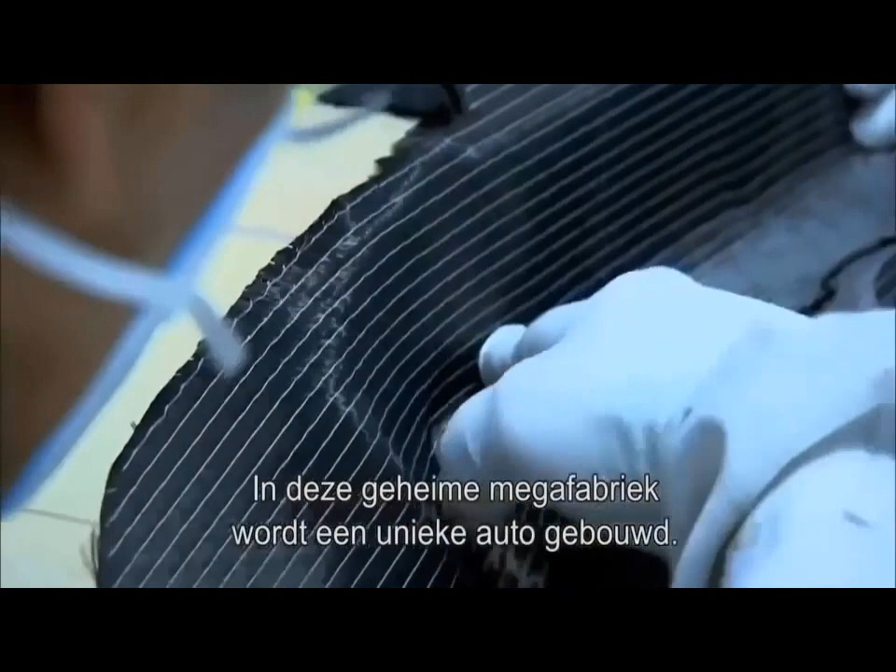Inside this top-secret megafactory, a car like no other is taking shape. Craftsmen hand-build what they consider an automotive work of art. Money is no object. This machine must redefine a billion-dollar brand. Failure is not an option.

Japanese marque Lexus sells itself on luxury, marketing its cars as elegant, quiet, high-tech, and efficient. Now, a different kind of car wears the Lexus badge, the LFA. Aggressive, loud, agile, with the highest revving V10 engine in a production car, reaching 325 kilometers per hour. A car like nothing Lexus has ever produced before.

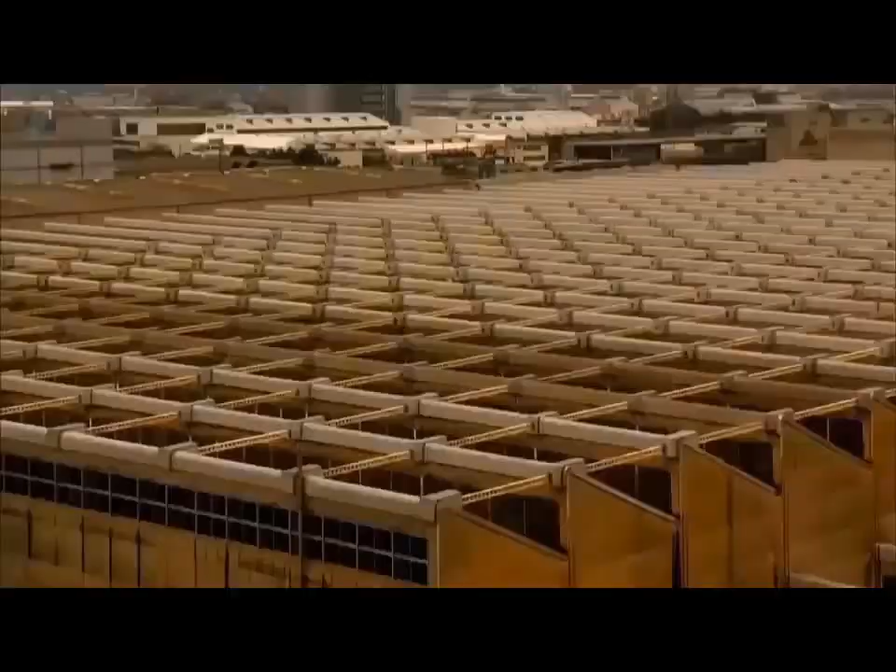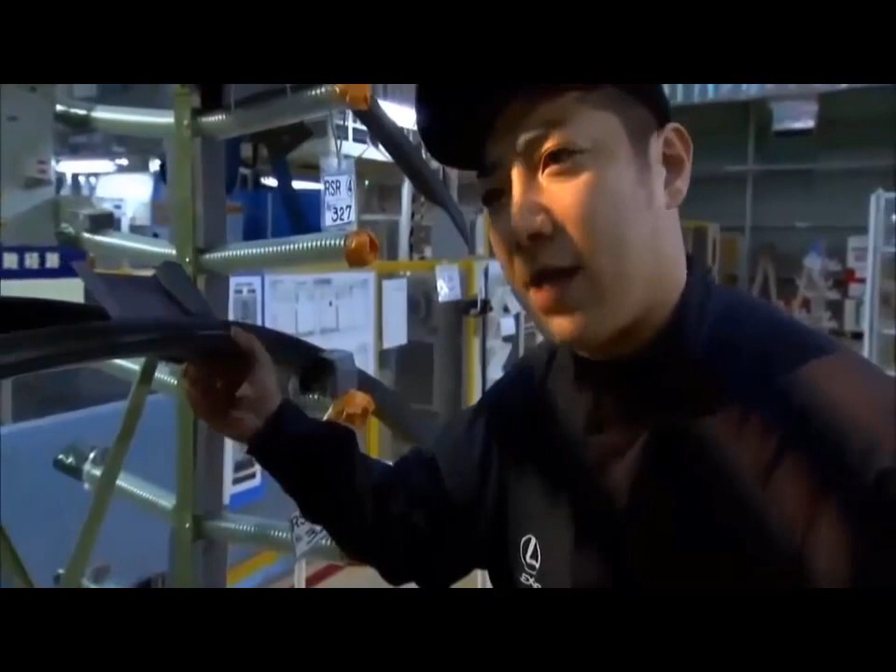The company transformed two unassuming blocks of this megafactory to create the LFA. They then scoured Toyota's 50,000 Japanese workforce to handpick just 175. All the associates here at the LFA Works feel they are artisans, not just operators. These artisans are known as takumi, Japanese for craftsmen, a status only conferred on the most highly trained, skilled workers.

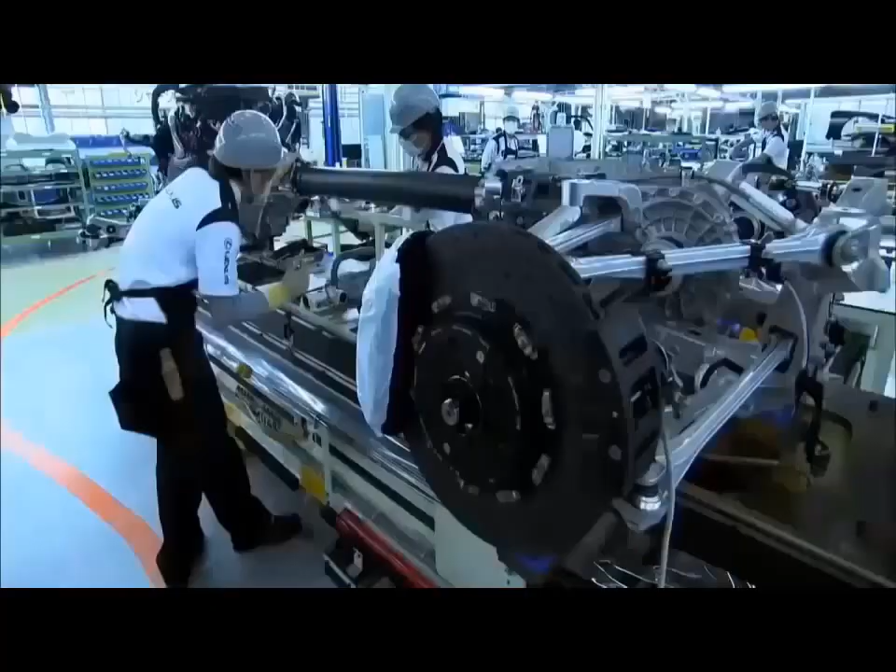Each and every associate at the LFA Works is seeking to achieve perfection, taking this challenge on with a sort of samurai spirit.

Yamanaka Shigeru is manager of the LFA Works. His teamwork credentials come from another time-honored Japanese tradition: baseball. Before this, I was working as manager of the Toyota Motor Corporation baseball team, which brought people together from lots of different backgrounds. It was because I could manage that organization that I was made manager here.

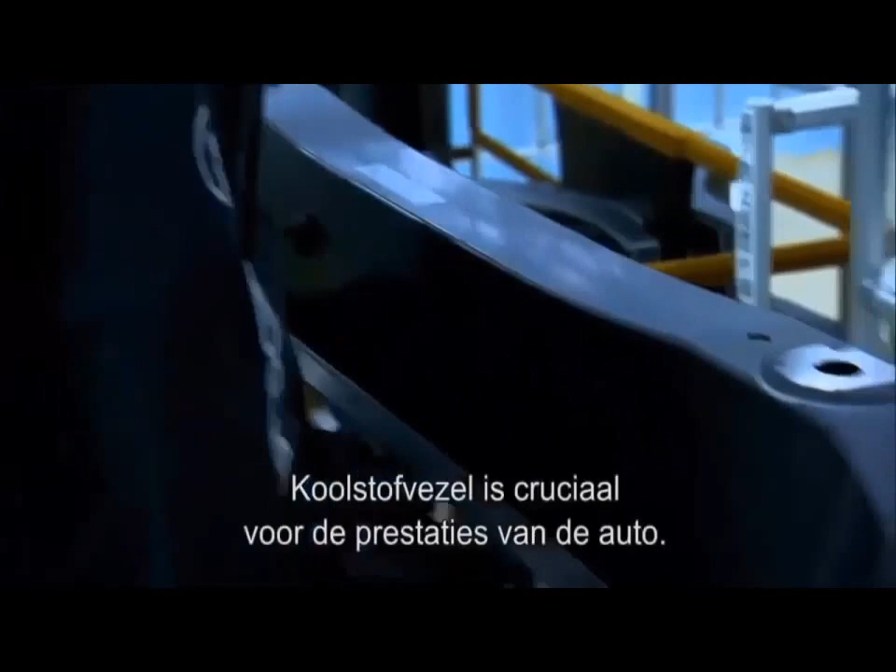To reach their goal, the tight-knit team utilizes sophisticated tools and materials to build the car. The most important of these is carbon fiber composite. Carbon is crucial to the car's performance. It's a material 5 times the strength of steel, yet a quarter lighter. It's the construction material of choice for both Formula One racing cars and the aerospace industry.

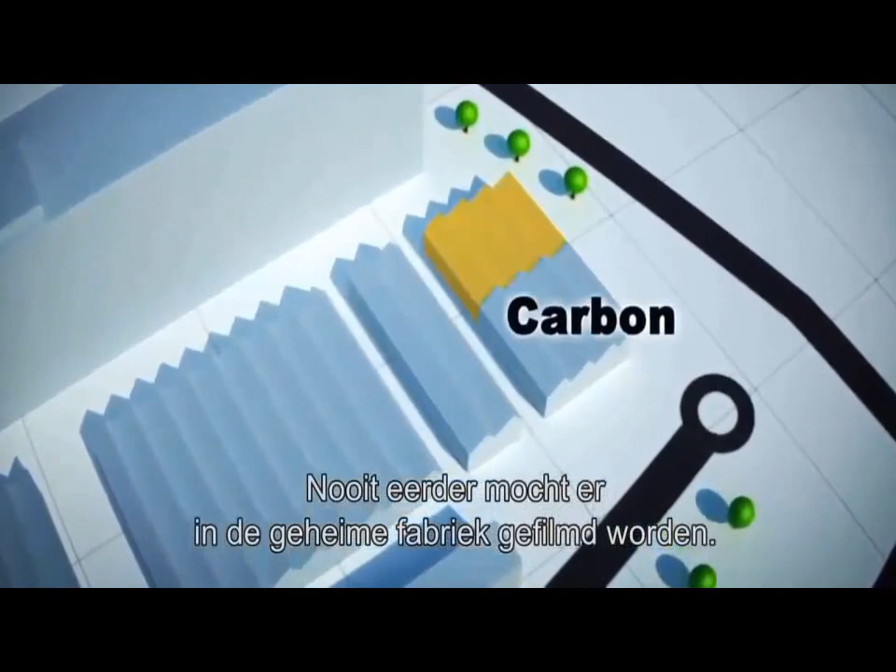The company even makes their own carbon fiber here on site. Up until now, no television cameras have ever been allowed inside this top-secret facility. First, simple strands of carbon fiber are woven into a pliable cloth using an automated weaving machine. This fabric is then transformed through heat, pressure, epoxy resin, and labor-intensive techniques into the car's core, known as the tub.

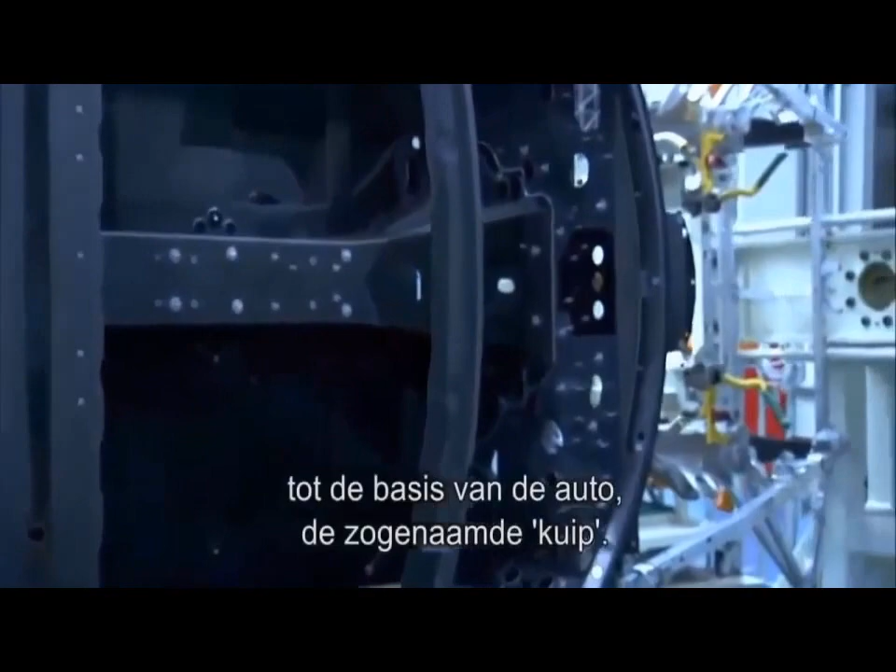The tub is pieced together like a 3D jigsaw. It starts with the construction of the floor. To make it, precisely cut carbon fiber cloth is lifted onto a mold. Next, skilled takumi smooth the supple fabric over the mold. This one is for the transmission tunnel that will house the drive shaft and exhaust.

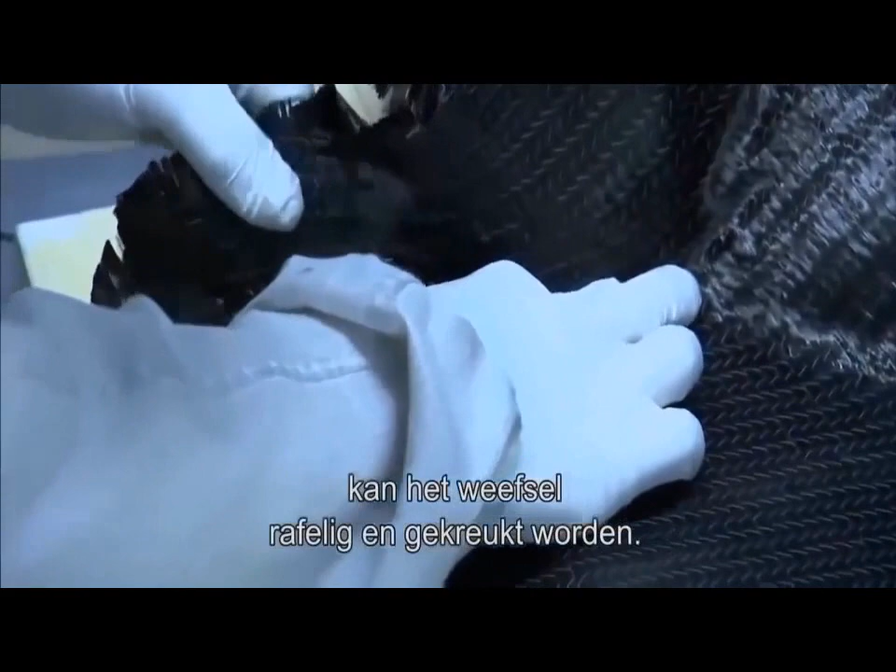In very complex areas like this, the fabric inevitably becomes frayed and not very neat. The associates work with these areas as if working with silk, taking great care every day. They also wear masks to avoid breathing in the hazardous fibers. In the beginning, the associates found it very difficult to work this material. It was much easier when they used an iron.

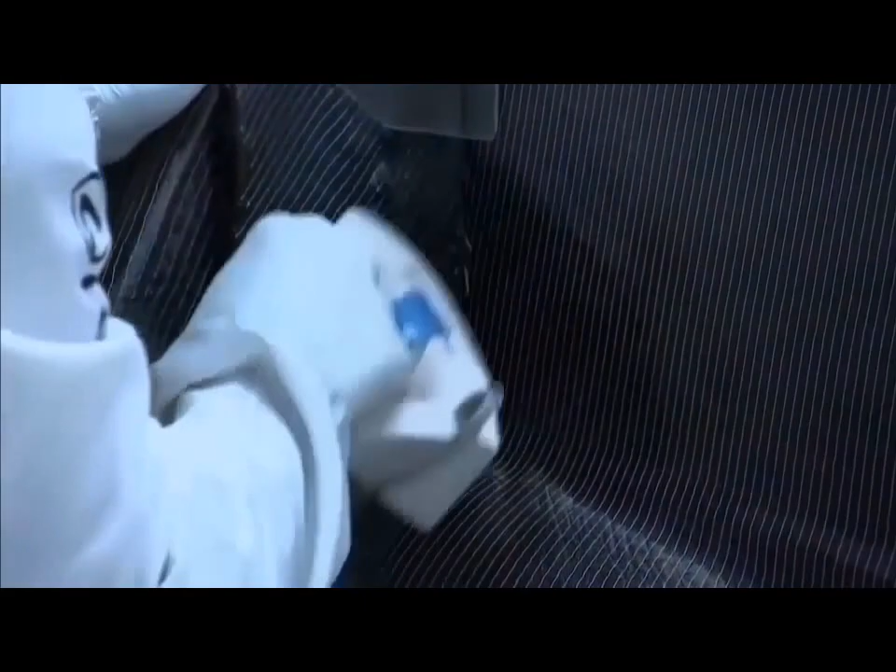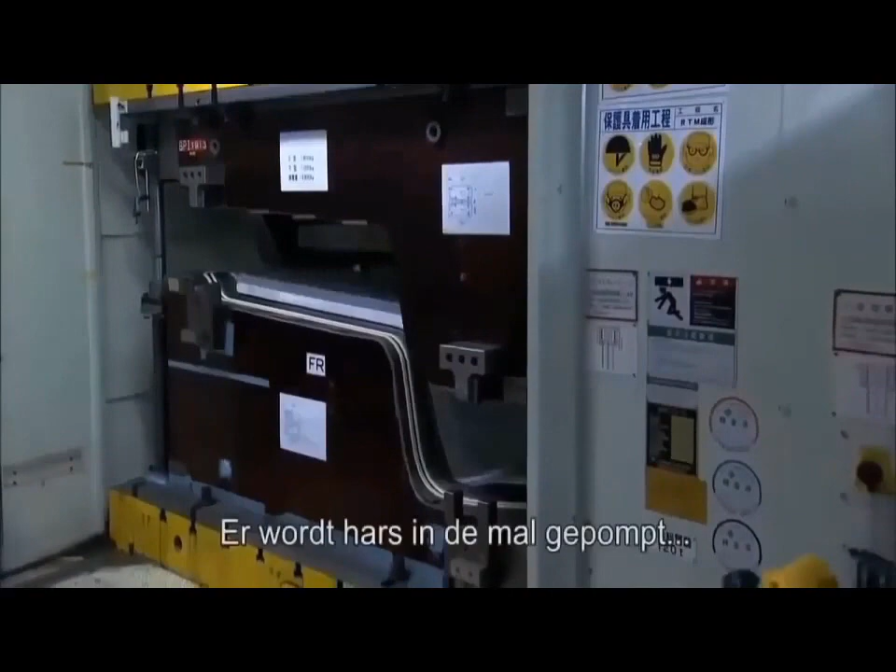Back in 2000, the concept of a world-beating supercar only exists in one man's head. At the company, I talked to just a small group of people at the top, not expecting anything, and they said, go ahead and try.

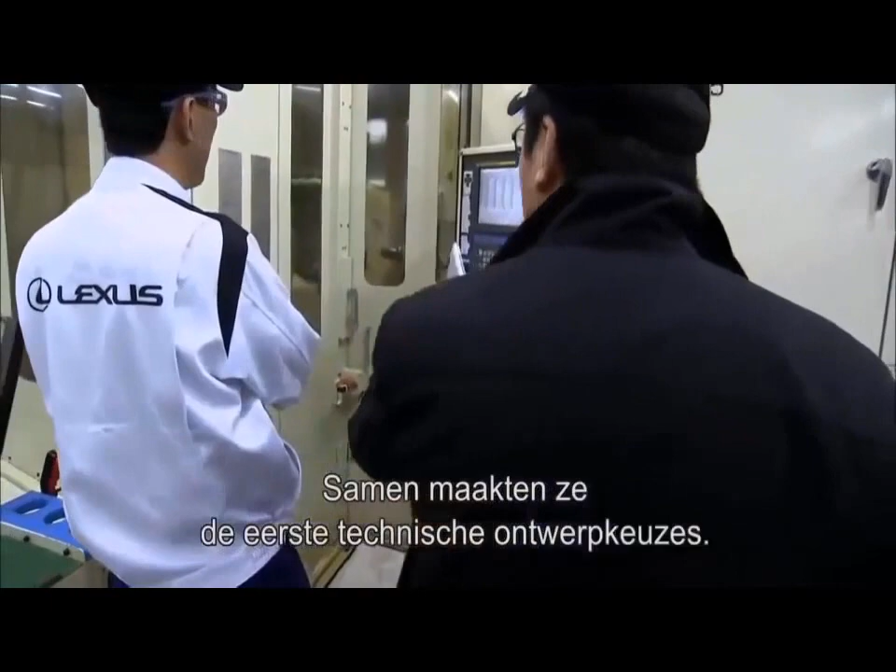With permission to proceed, Tanahashi gathers a team of engineers around him, and they start to make the basic engineering decisions. In the beginning, we planned to make the body from aluminium.

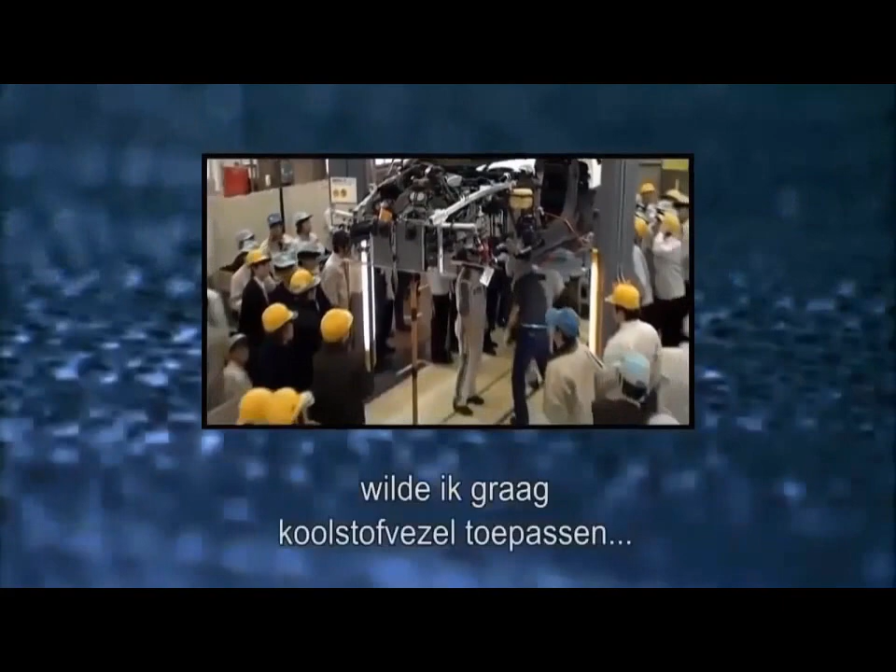But Tanahashi is fascinated with the possibilities offered by carbon. Developing a supercar, a super sports car, carbon fiber was a material I really wanted to try using, if at all possible.

But this wonder material has its drawbacks. It's expensive, and the company has never used it to build any of their cars before. Despite these significant challenges, Tanahashi gets his way.

In 2005, my boss said, why not go for carbon? Slapping me on the shoulder. And I made the decision to go for carbon then.

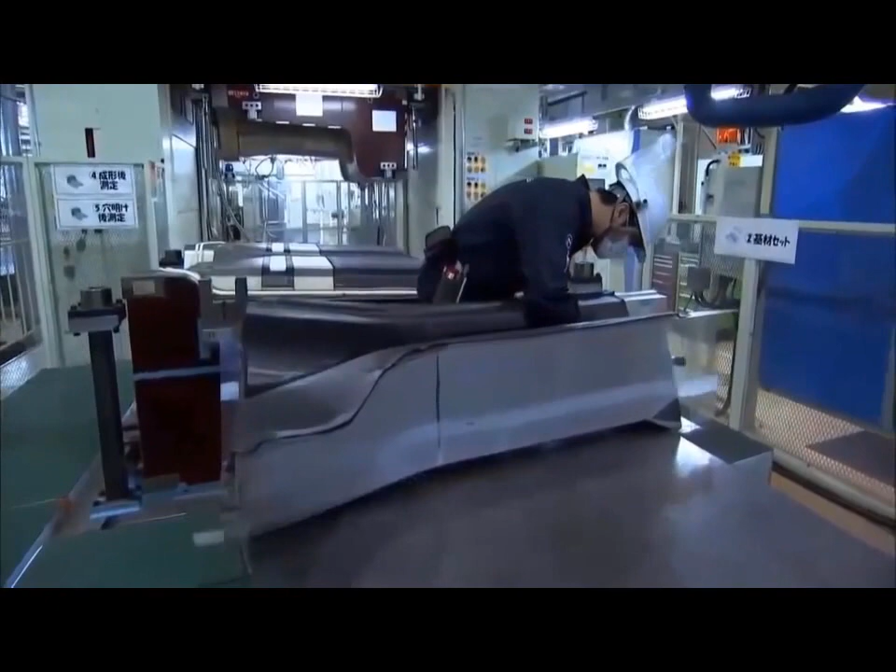It's a bold step. Everyone involved with this project must master a material they have no experience with at all. It was the first time the workers had touched carbon, and everything about it was difficult for the workers.

In the state-of-the-art carbon fiber facility, the Takumi are returning from lunch. They vacuum themselves down to remove any foreign particles before entering a highly confidential sealed room.

Here, the majority of the tub's central frame is created using the most intricate techniques. In this process, an automated laser cuts out hundreds of individual shapes from carbon fiber cloth that's been pre-impregnated with a sticky resin.

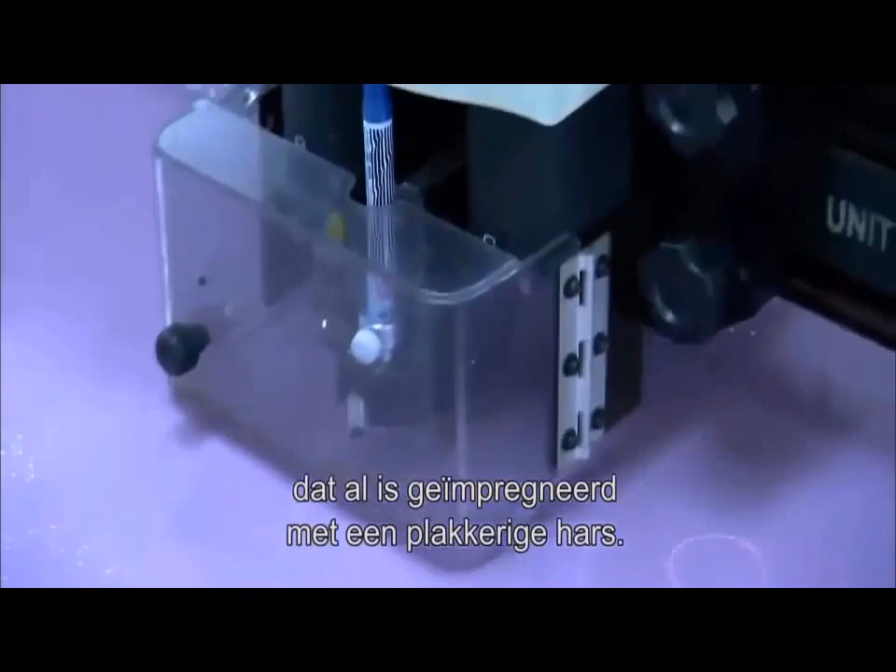Next, Takumi layer the cutouts, up to 20 sheets deep, onto a mold. This one will make the right side panel. The associate uses a dryer to raise the temperature of the laminate and half melts the resin as he applies it.

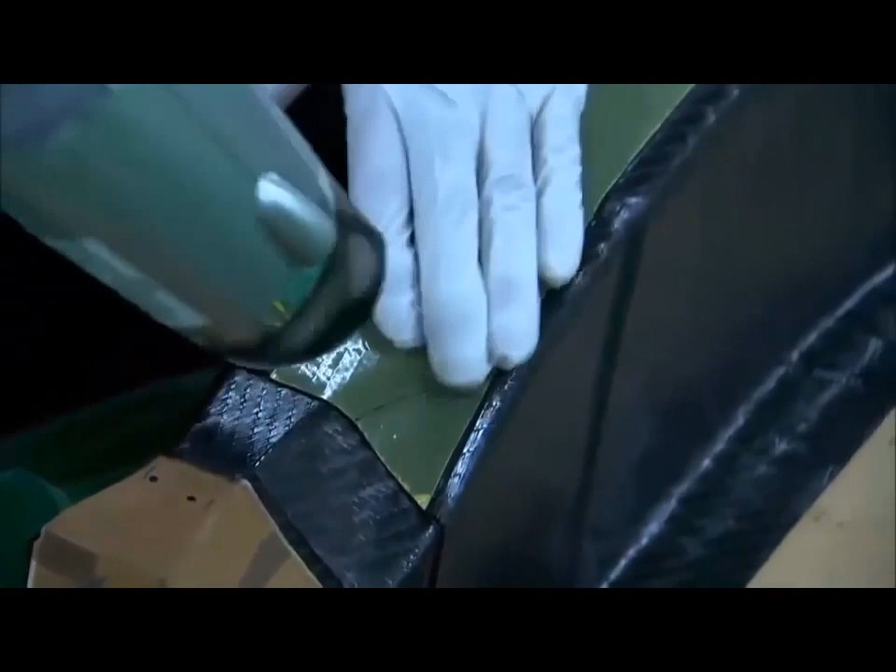The tacky cutouts stick to each other and any gaps are squeezed out using a vacuum bag that forces them together.

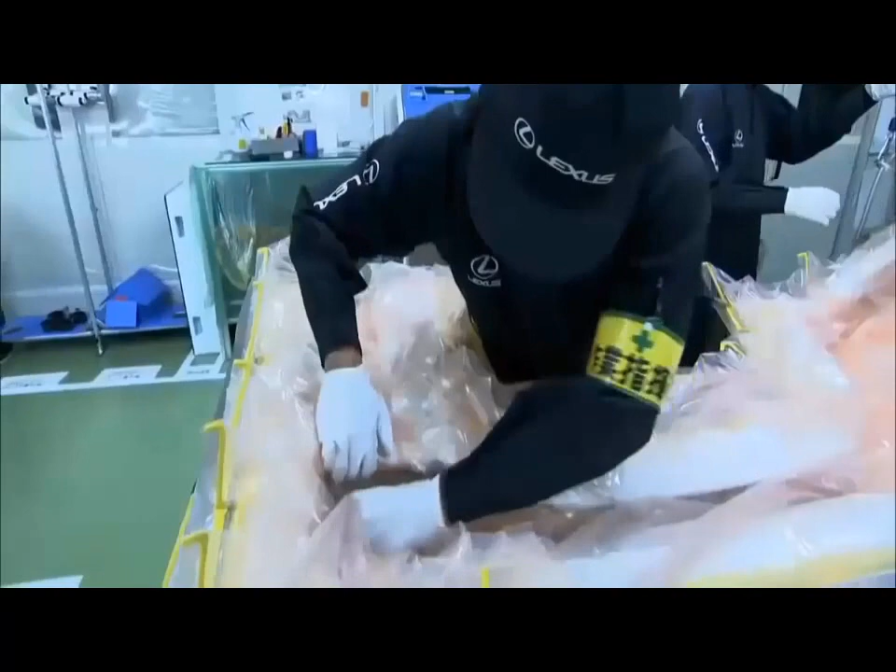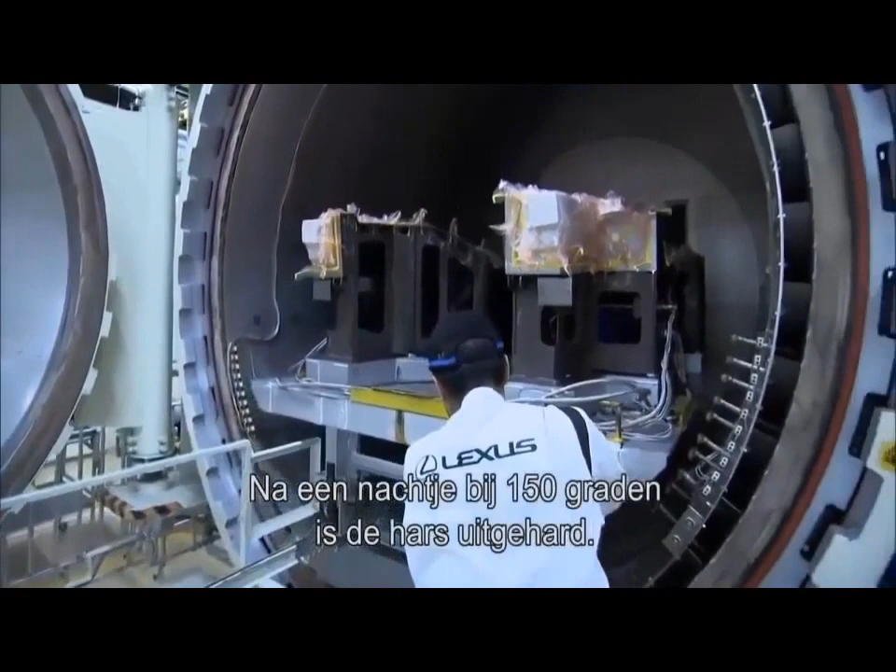The shrink-wrapped side panel is then wheeled across the works and loaded into a pressurized oven. Baking overnight at 150 degrees Celsius sets the resin, resulting in a side panel that's both ultra-strong and ultra-light. An aluminium equivalent would be twice as heavy.

Weight saving is the holy grail for all auto engineers. Less weight and more power leads to increased acceleration, and speed defines a supercar. The body of the LFA is 65% carbon fiber, helping it accelerate from 0 to 100 kilometers per hour in 3.7 seconds.

If made of aluminium, it will be 100 kilograms heavier, like having a sumo wrestler in the passenger seat. As it is, this car weighs just 1,480 kilograms all in.

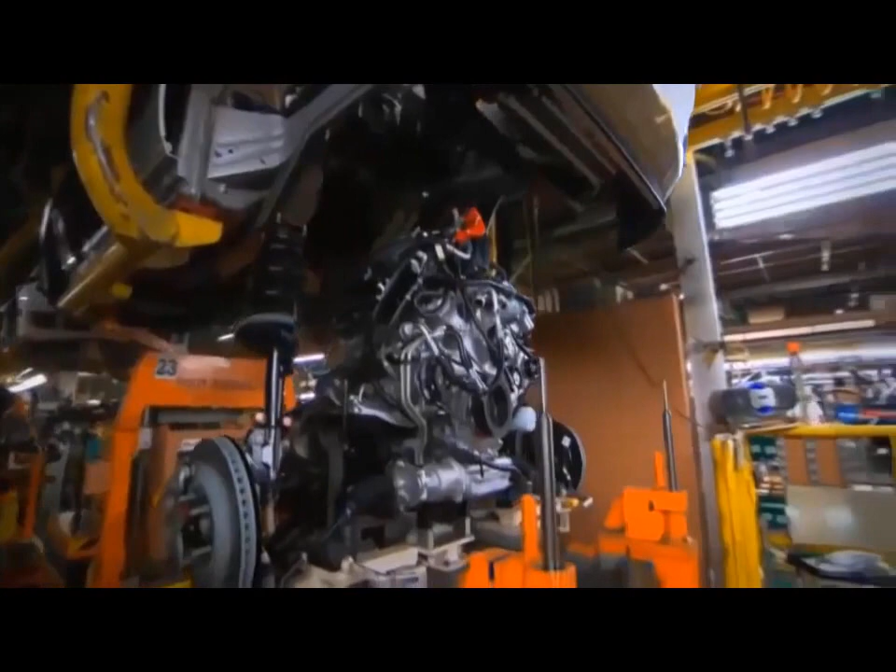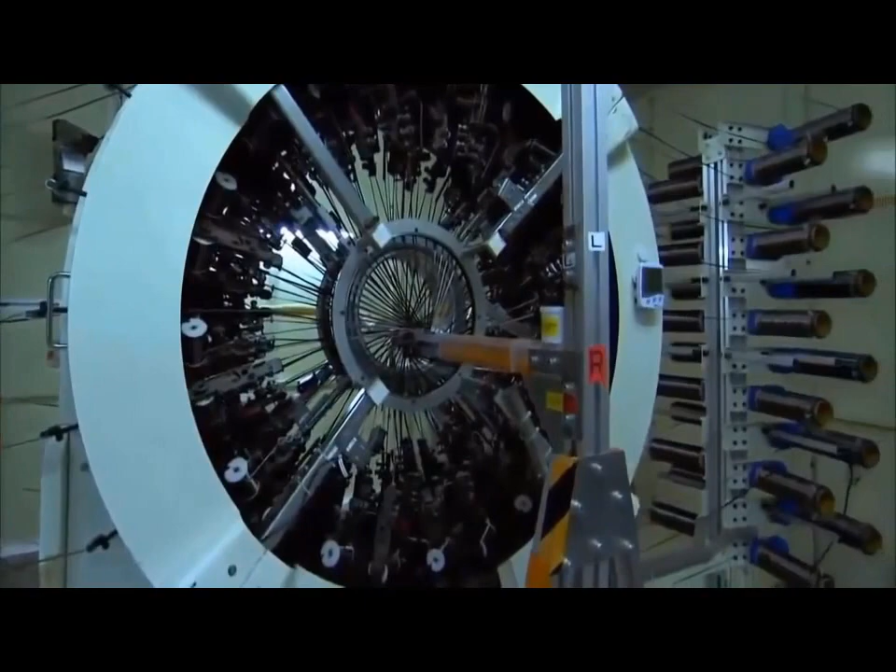Back at the factory, in a locked room, a bespoke machine creates two crucial parts to complete the tub's construction. The roof rails support the windscreen, as well as protecting the driver if the car rolls over.

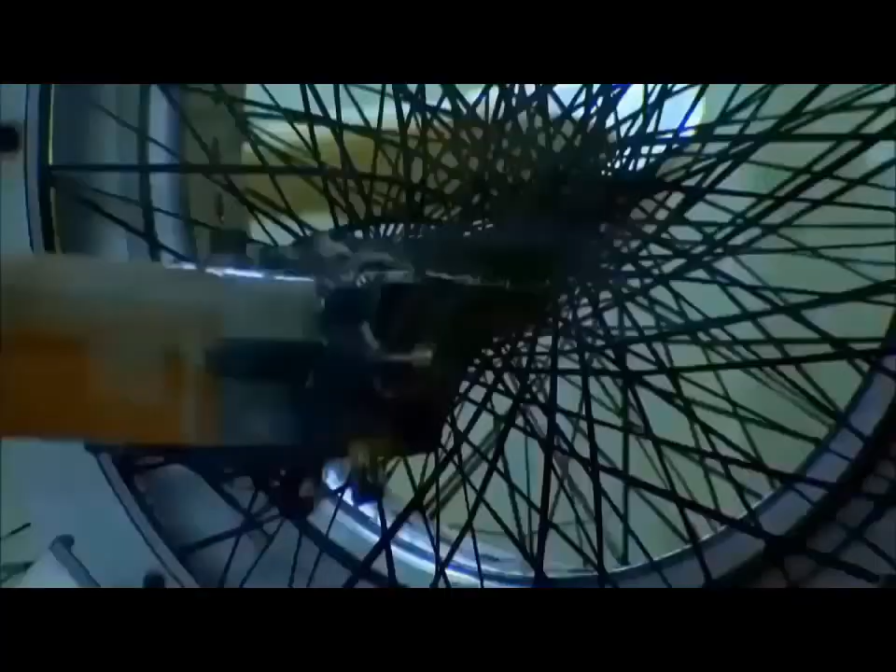This custom-built circular loom weaves the carbon rail in 3D. It uses lasers to control the feed of carbon fiber strands onto 144 bobbins. These knit the carbon around a top-secret automated template that's fed through the center of the loom.

This is done twice over to cross-hatch the carbon weave, so giving the rail its strength. The whole mechanism has its own control box, and for good reason. If something goes wrong, even a little thing, the shape gets distorted immediately, so the operator constantly pays attention to avoid this.

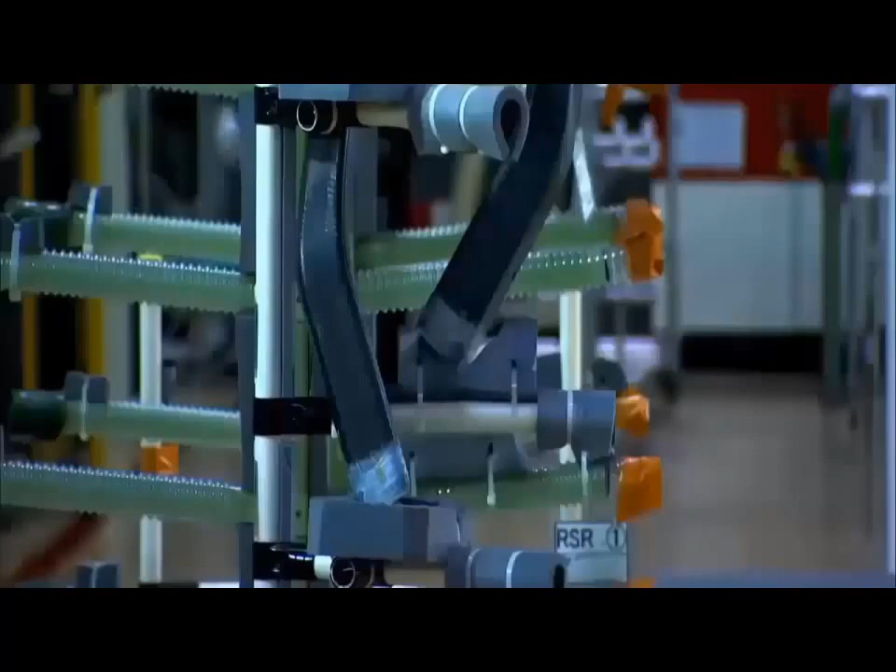The side rail is heated and impregnated with more resin to complete its metamorphosis from a flexible tube to a rock-hard rail. You may think that this is quite heavy, but it is only 2 kilograms.

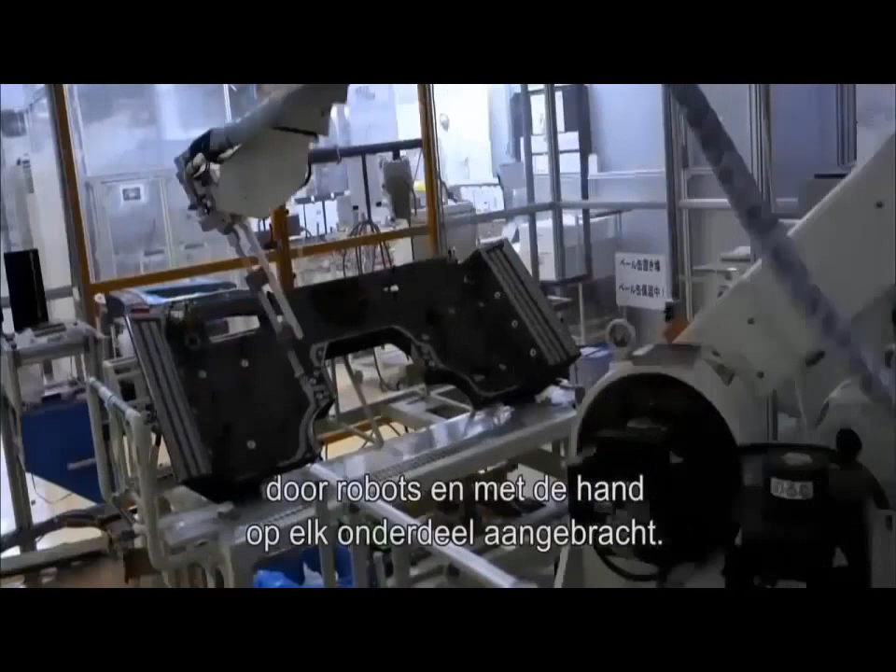The tub is bonded in another top-secret jig. First, a super-strong adhesive, known as epoxy resin, is applied by robot and hand to each of the parts. The separate parts are transferred to the jig and locked in place. Pop rivets keep the pieces aligned.

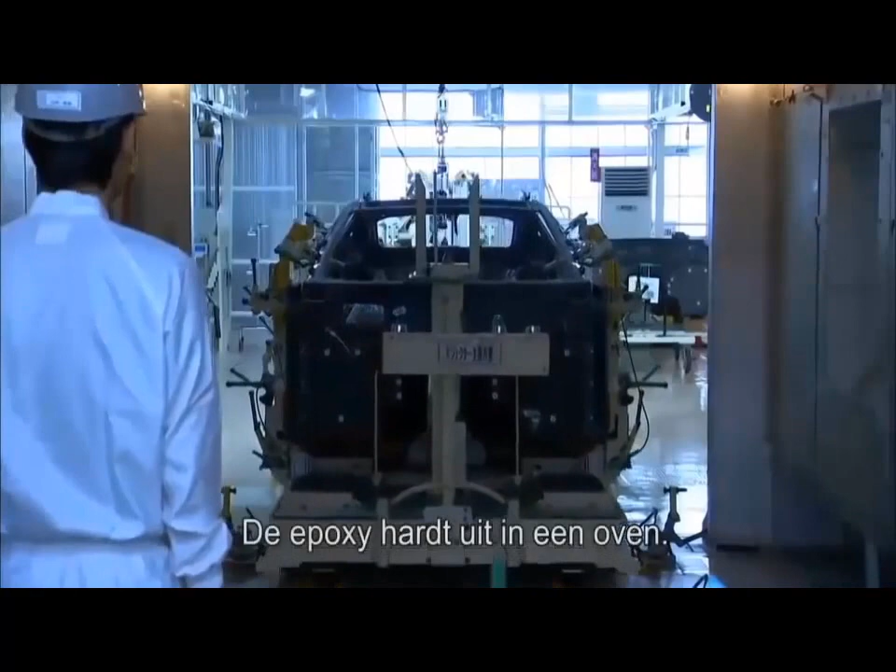To cure the epoxy, the jig is pushed into an oven and then baked for 60 minutes at 60 degrees Celsius. The resulting tub is so strong, it acts as both the structural core of the car and as a crush-resistant safety cell, should the car crash.

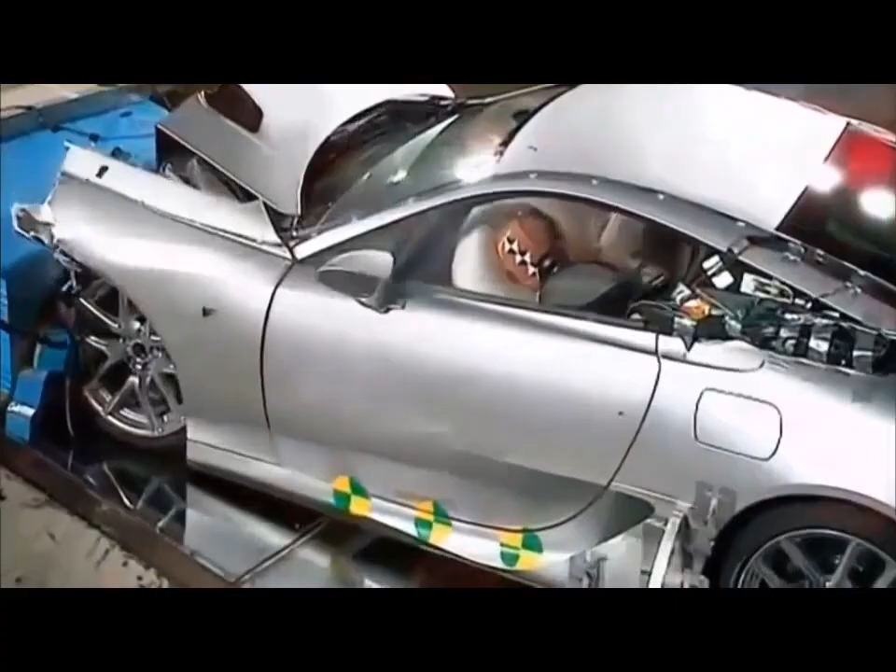The challenge now is for Matsumoto Kengo, chief designer of the LFA, to create a car with a body as technical as it is elegant. For us, aerodynamics, heat and airflow management should be tangible in the design.

A conventional car cools its engine with forward-mounted radiators that suck cold air through a front grille. Not the LFA. Front space is at a premium, so coolant is pumped from the hot engine to twin radiators mounted behind the car's rear wheels. Matsumoto had to shape the car to funnel cold air to these vital components.

Airflow management is optimally controlled by setting the angle between the door mirror and the cabin. It goes past the cabin and smoothly into the air intake for the rear radiator. This shape is not just for styling. The intake is deliberately formed here, from the base of the glass. The result is an airflow system capable of cooling the engine even under the most extreme race conditions.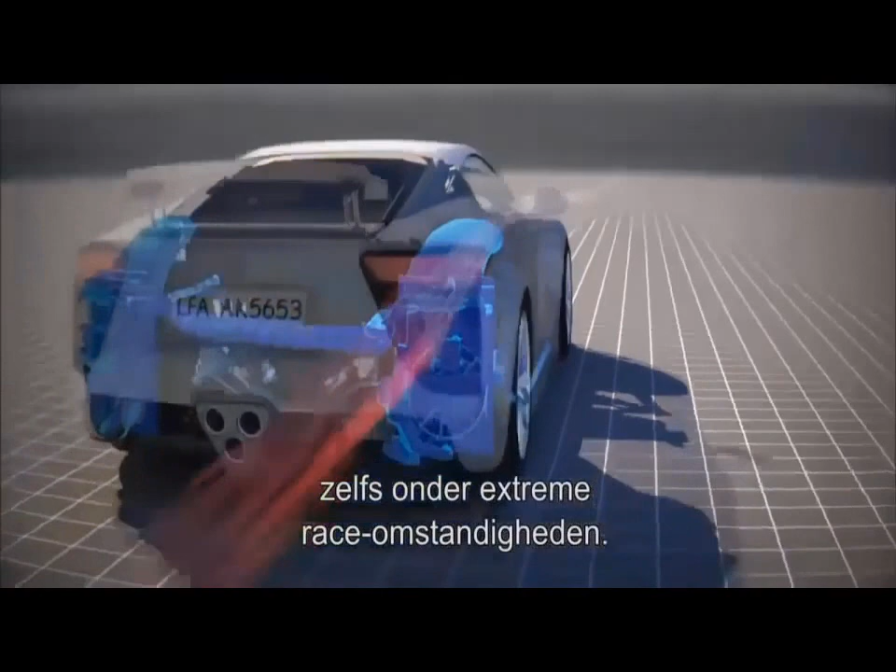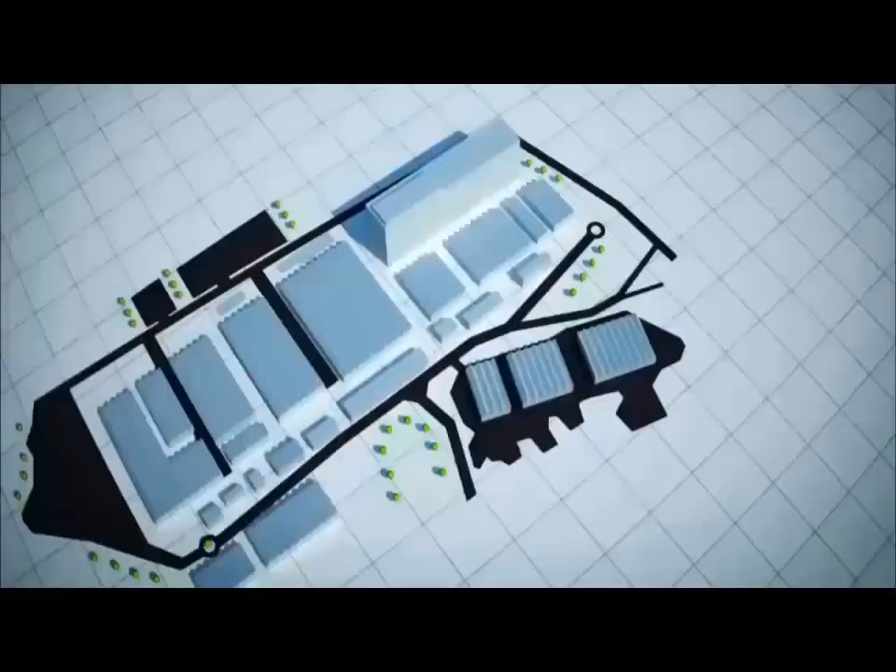It's 8:45 in the morning at the LFA works. The Takumi are warming up for an 8-hour shift ahead. Their first task is to greet the bare cabin as it arrives from its 15-day build in carbon round the corner. In assembly, the cabin will progress through 4 positions: trim, chassis, final, and alignment.

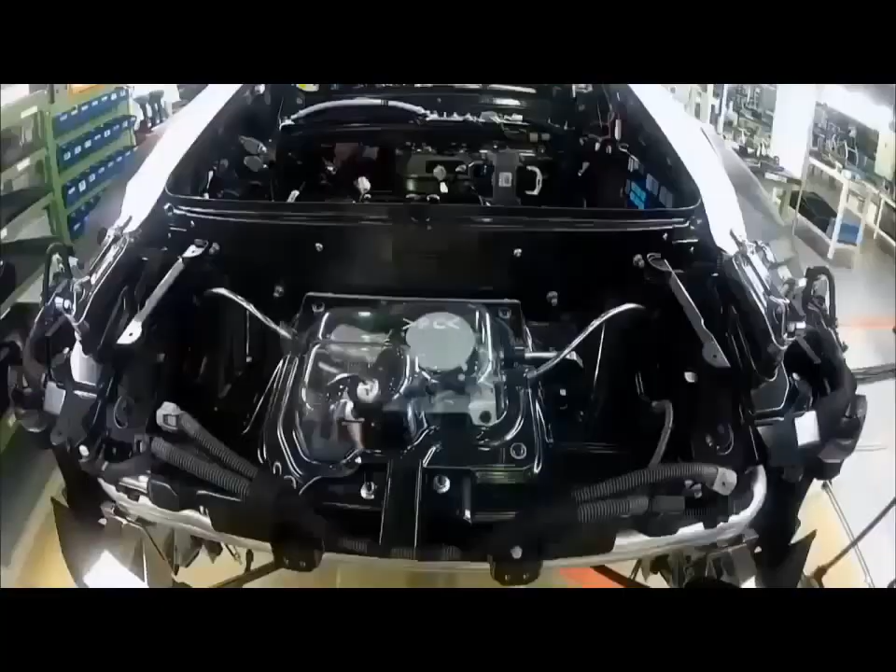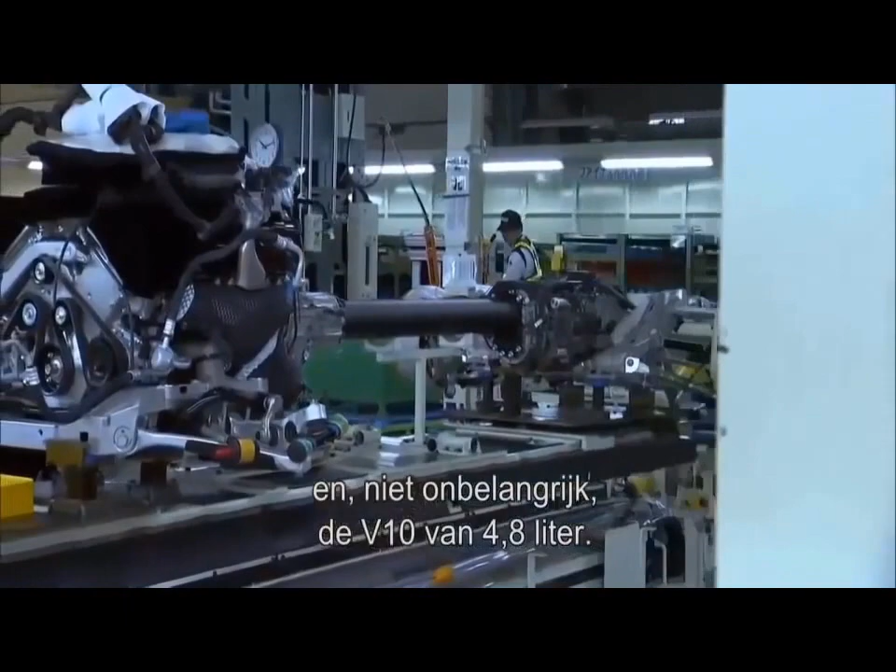15,000 parts go into making an LFA. The first of these are attached here in trim. Just meters away, other Takumi assemble the drivetrain and suspension. The drivetrain comprises the transmission, torque tube, and last but not least, a 4.8-litre V10.

The location of this engine is crucial to the car's entire concept. I wanted to build the car around the people in it. And for a supercar that puts people first, the optimum place for the engine is front mid. This front mid location puts the engine between the driver and the car's front wheels. With the transmission placed at the rear, the driver is in the center and the car feels balanced to drive.

The aim is to make the car's handling as good as possible. But a front mid configuration dramatically restricts the space available for the engine. Tanahashi has a problem. You need an engine of a certain size with a certain degree of compactness, but you want a high-powered engine as well. Tanahashi needs a small engine to fit in the restricted engine space, but he also needs the power of a large engine because power equals speed.

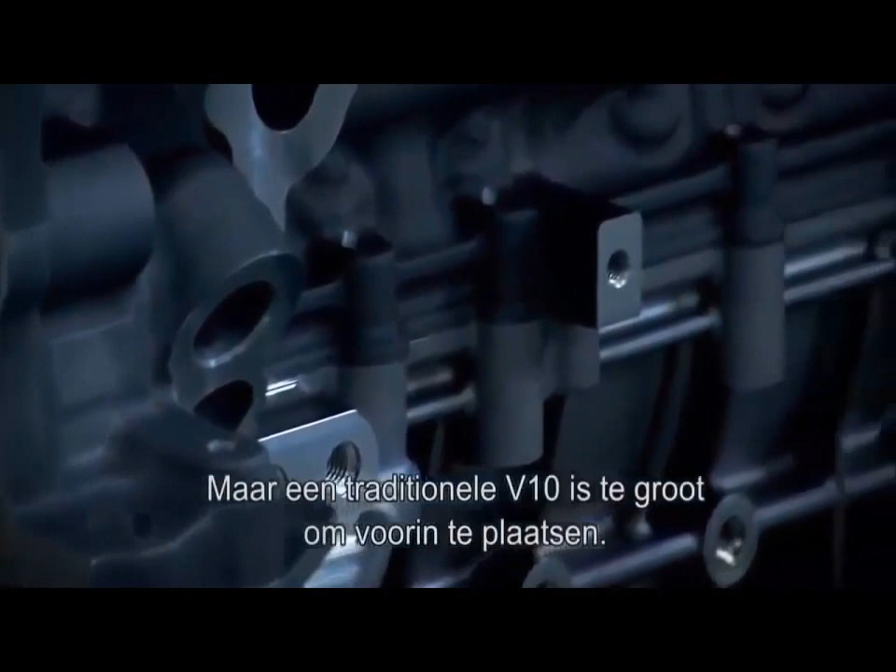And that isn't all. The high-pitched sound of Formula One makes you shiver, doesn't it? I really wanted to have that as part of the LFA. Only a high-revving V10 engine supplies this combination of power and sound, but a traditional V10 is too big for this mid-front configuration. Lexus have made nothing like this before. Their production line cars use 6- and 8-cylinder engines engineered for a super quiet ride. This V10 will be the opposite.

Tanahashi turns to some old friends for help. We are a motorcycle manufacturer. We understand power alone is not enough in a vehicle. For a sports car, small and lightweight is critical. For almost half a century, Yamaha have worked with Toyota to create high-powered lightweight engines and cars.

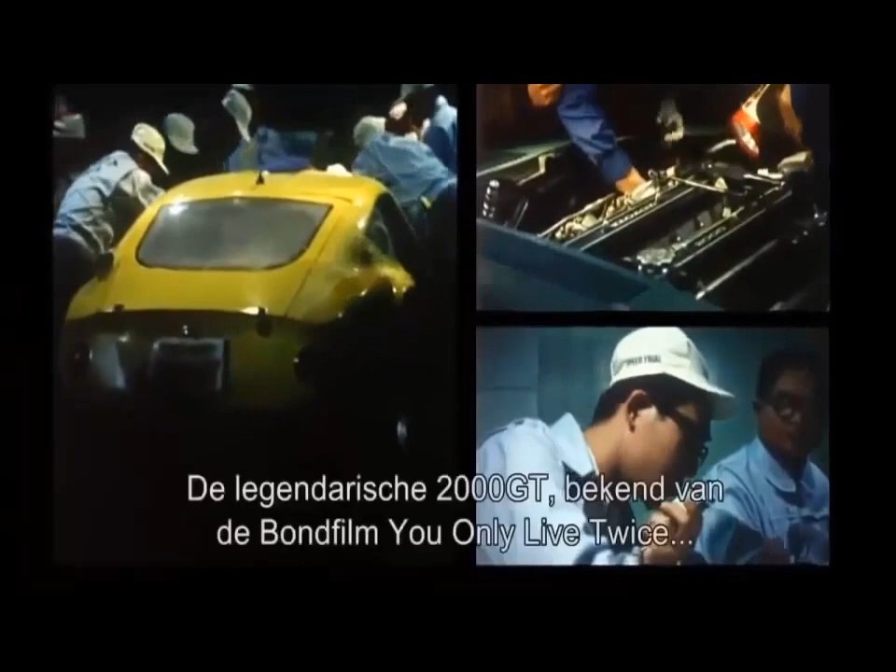The legendary 2000 GT, star of the James Bond film You Only Live Twice, and Japan's first true sports car, was the first fruit of their collaboration.

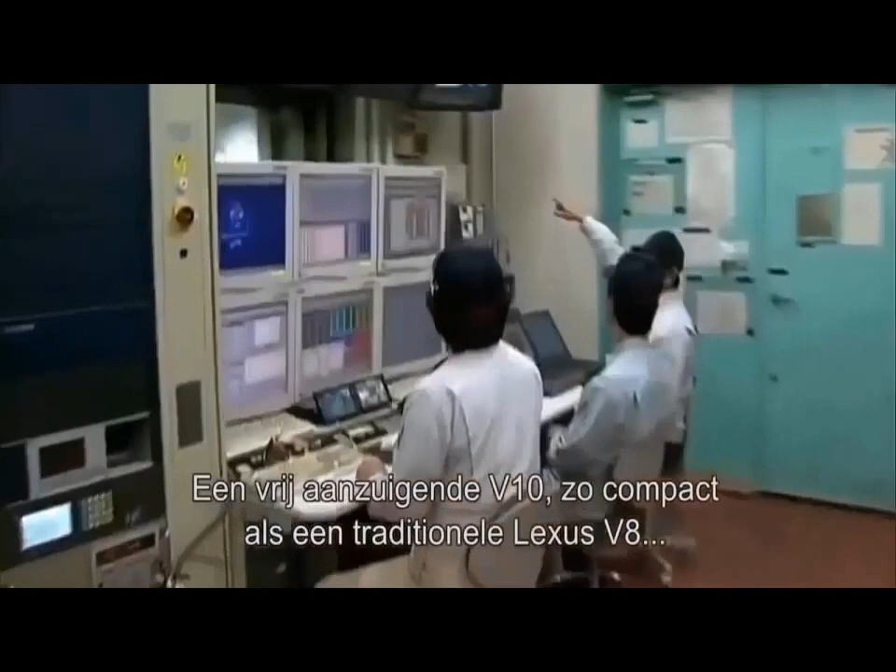Headed by Lexus engine guru Okamoto Takamitsu, the team sets itself an ambitious goal: to create a naturally aspirated V10 engine as compact as a traditional Lexus V8, with the weight of a V6. I wanted to create something different to any other supercar engine.

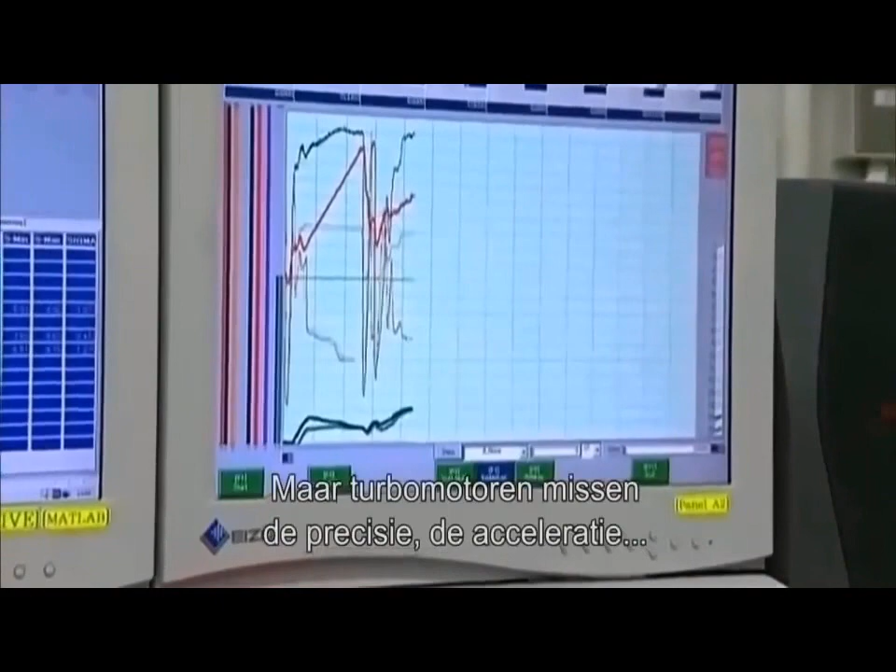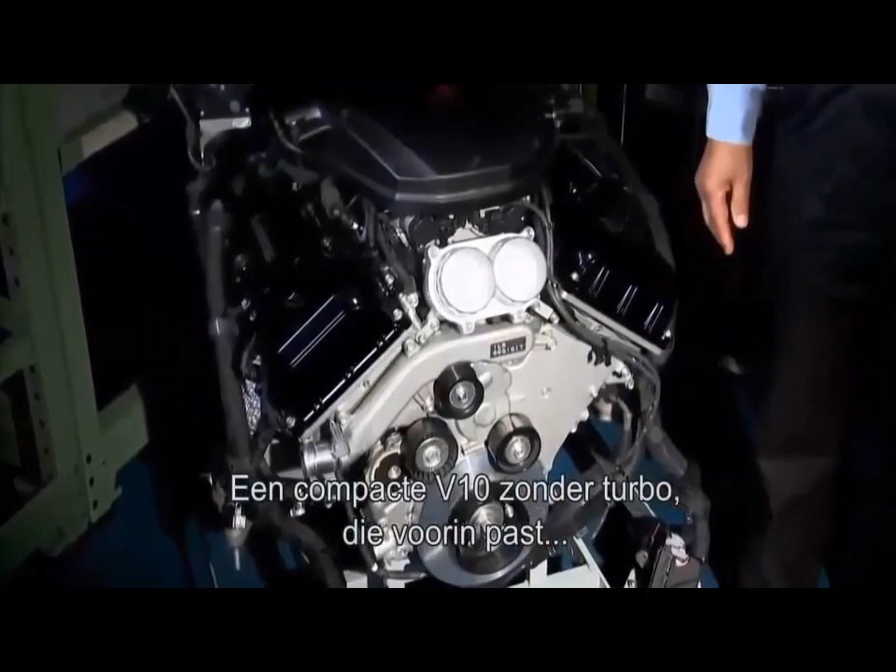Normally, engineers use turbochargers to boost the output of smaller engines to simulate V10 power. But turbocharged engines don't have the rapid response, acceleration or sound of a naturally aspirated V10. By using Yamaha's motorcycle know-how, the lightest metals, and redesigning the engine's guts, Okamoto creates a masterpiece of engineering. A non-turbocharged compact V10 that fits into a mid-front design while keeping weight to a minimum.

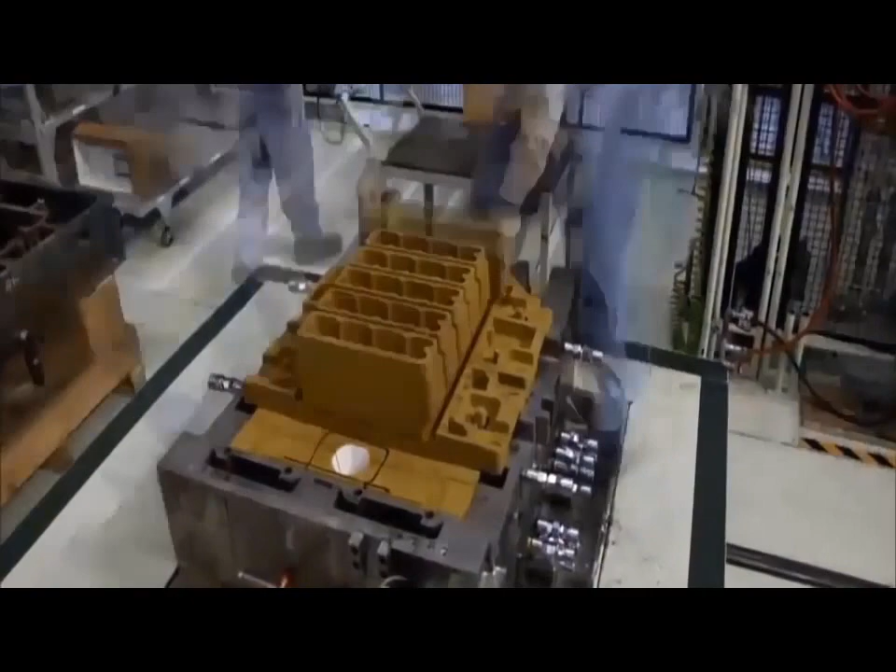The engine starts life in Toyota's Miyoshi plant as molten aluminium. It's cast in a 3D resin-impregnated sand mold made from 37 individual blocks that take a week to fashion. With the blocks fitted together, the mold is ready to be filled. At 750 degrees Celsius, impurities are scooped off the top of the molten aluminium. The liquid metal flows into the mold as a vacuum sucks out any contaminating gases.

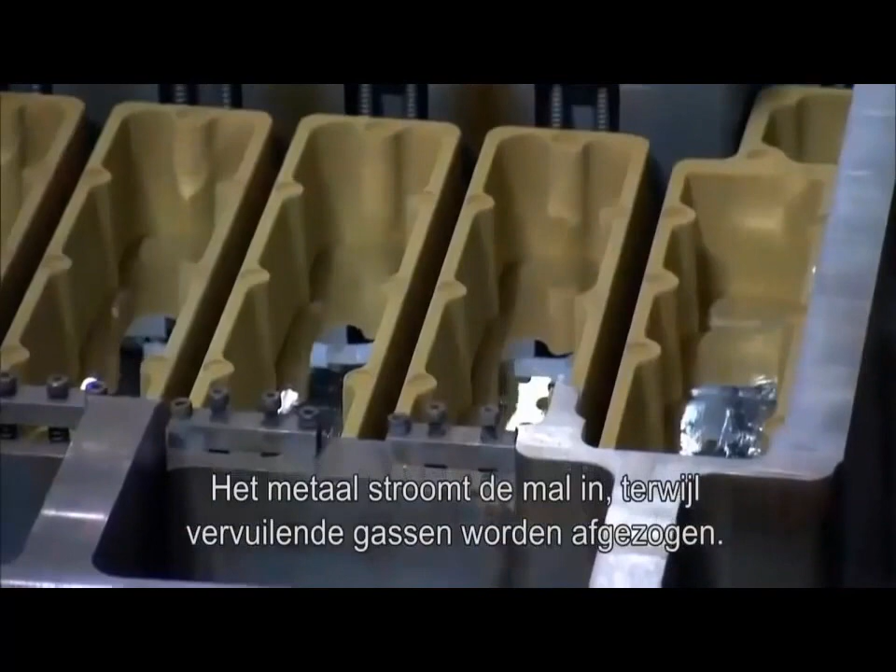Two hours later, with the metal set, the sand is hammered off to reveal the solid aluminium engine block inside. It's off to Toyota City's Honsha factory and the company's highly confidential Formula One engine facility. These works are always off limits. We're going to go in.

Are you ready? Come in. Television cameras have never been allowed in here before.

For a decade, Toyota spent big competing in Formula One racing. But without a win in 139 races, they withdrew in 2009, leaving this state-of-the-art facility idle.

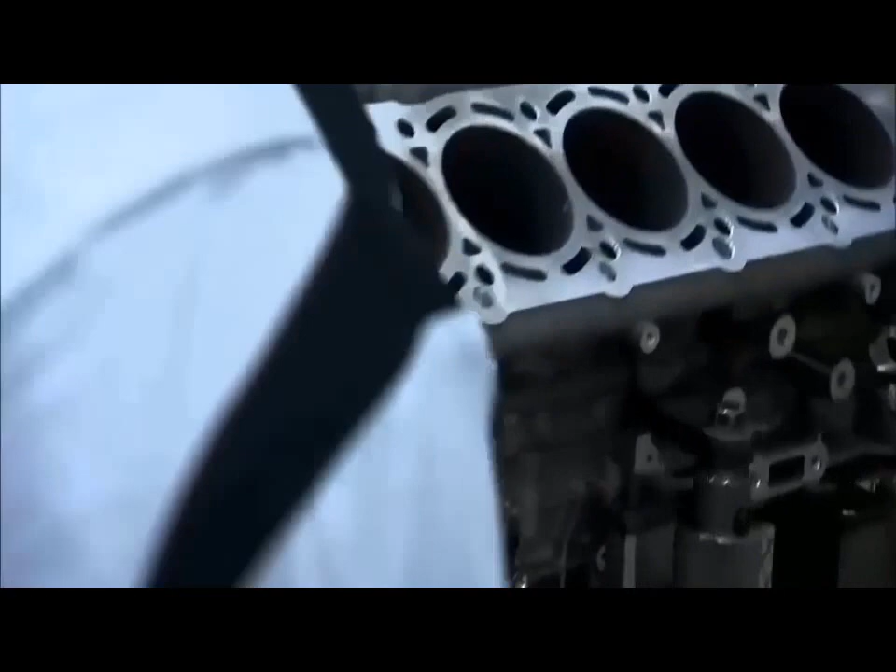For the LFA team, it was too good an opportunity to miss. The close parallels with F1 engine technology make this milling facility a ready-made fit.

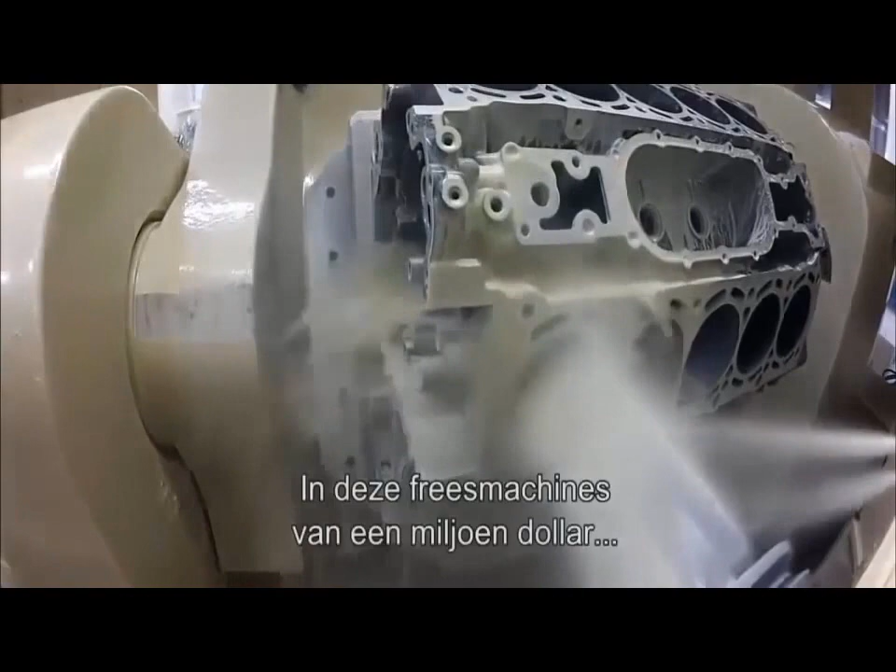In these million-dollar automated machining tools, the rough engine casts are milled, drilled and polished before emerging as precisely spec'd engine blocks.

Then the robots hand over to humans. In a sealed room, Takumi hone every sharp edge using precision polishing tools.

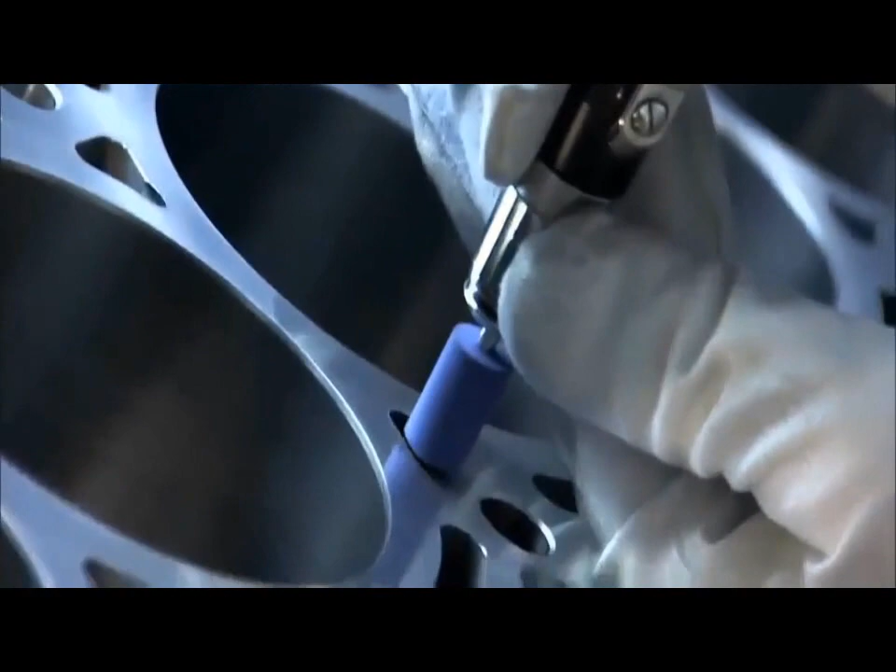Finally, a highly skilled Takumi pre-assembles the finished engine blocks to check they fit precisely. These blocks and screws are paired for life. Disassembled, they travel as a unit to Yamaha's Iwata city plant, 90 kilometers southeast of Toyota City.

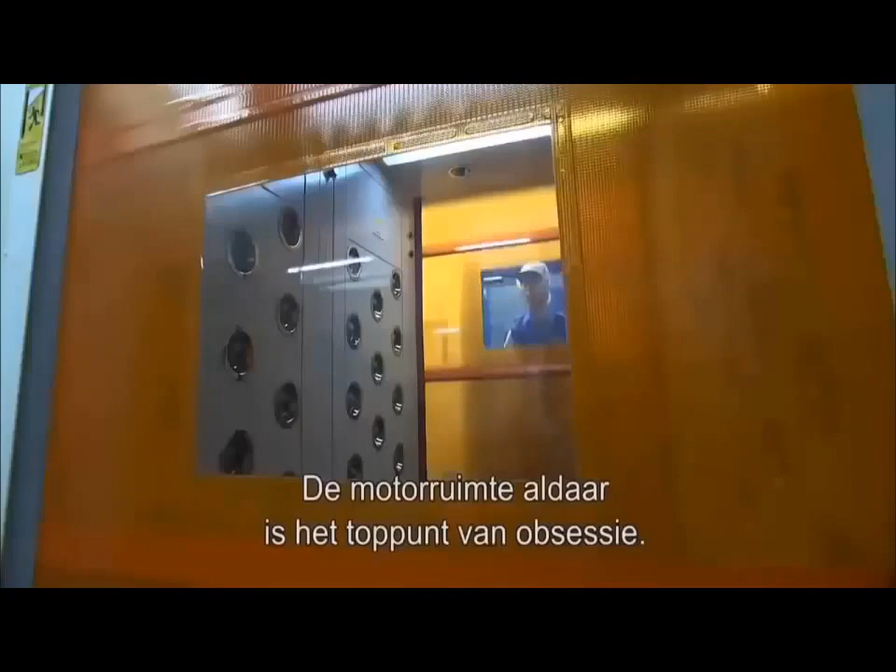The engine room here takes obsession to new heights. As you'd expect, hairnets and airlocks prevent any particle contamination. But the room is also kept at a constant temperature and humidity to ensure that every engine part is at the same state of thermal expansion during assembly.

This is more laboratory than workshop. The 2,200 engine parts are divided into 61 different kits for assembly by number.

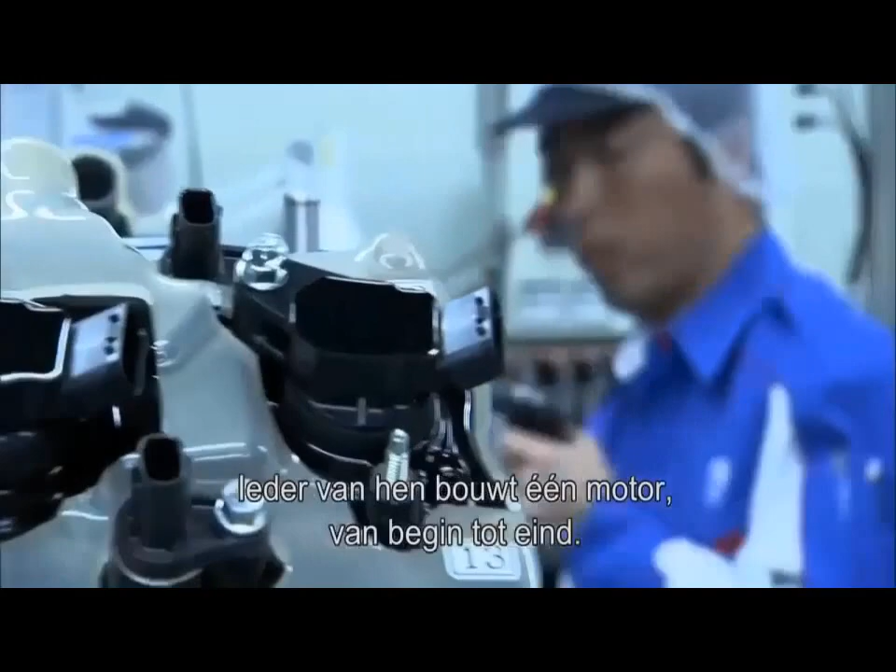Four highly trained Takumi work here. Each is responsible for a single engine from start to finish. To avoid any mistakes, they follow a series of on-screen instructions.

It takes 2.5 days to complete the build of one engine.

Each hand-assembled engine bears the Takumi signature.

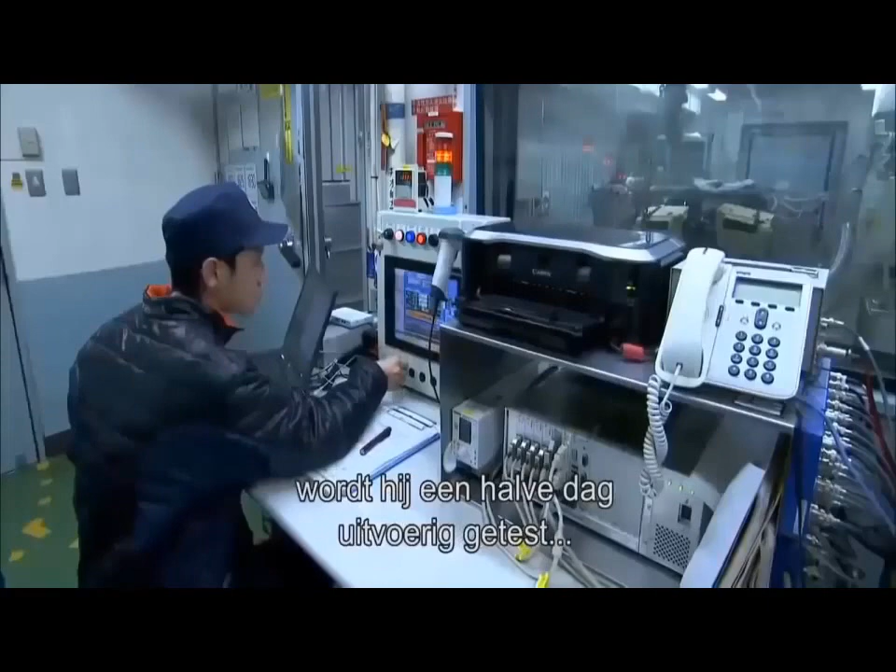Before this masterpiece goes anywhere near a car, it undergoes a half-day of exhaustive testing in the room next door to engine assembly. The resulting 4.8-litre engine is so responsive that it takes just half a second to reach 9,000 RPM.

That means instant acceleration, whatever gear you're in. This engine has excellent response and more RPM than any other commercially available engine.

Response time is so fast that a digital rev counter is the only unit able to keep up. And the sound of this high-revving engine is unmistakable.

The sound of the LFA is unique, and once heard, never forgotten. To achieve the engine soundtrack that Tanahashi insists upon requires more of Yamaha's specialist knowledge.

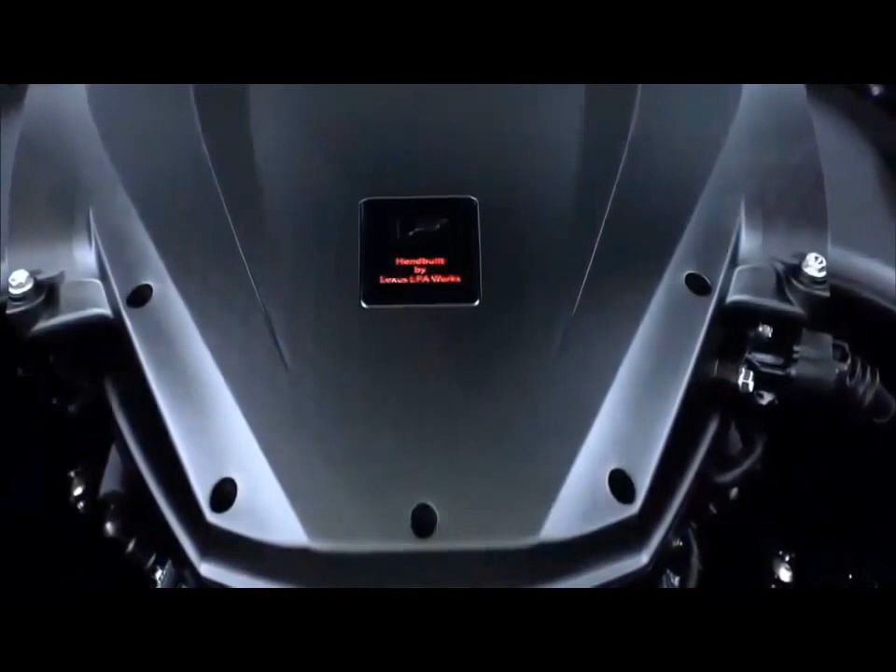We are a manufacturer of musical instruments, so when it comes to sound technology, we have a certain level of know-how. Honji Yoshikazu is obsessed with sound.

I think the relationship between a super sports car and its driver is like the relationship between a top musical performer and their instrument. When they play in a certain way, they can listen to that sound and use it to produce another, better sound.

Critically, a car has two different sound characteristics. One sound is the exhaust. You can call it an iconic sound. Just by hearing that sound, you know which car it is. The other, which we were particularly concerned with, is the sound heard by the driver.

To refine the driver's soundtrack, Heiji Maruyama, general manager of Yamaha Motors, had to redesign the component that sits on top of the engine, called the surge tank, by turning convention on its head.

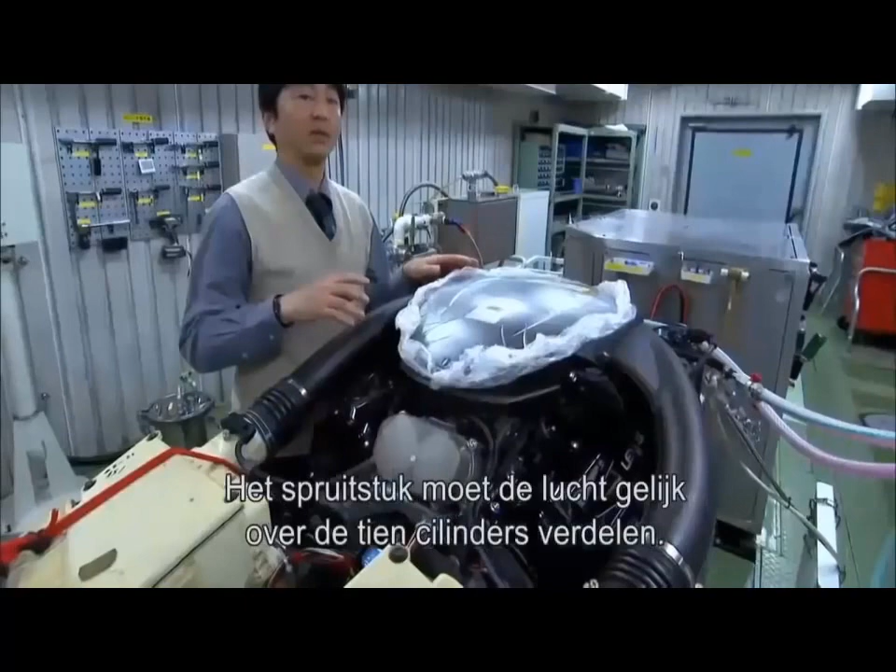The function of the surge tank is to send air equally into all 10 cylinders. Normally, techniques to reduce noise from the intakes are used. We thought to go the other way and use it to amplify the sound, to communicate it to the driver.

Maruyama tunes the chamber by varying the thickness of the surge tank's upper surface and adding internal vibrating ribs. The construction is very like that of an acoustic guitar or violin.

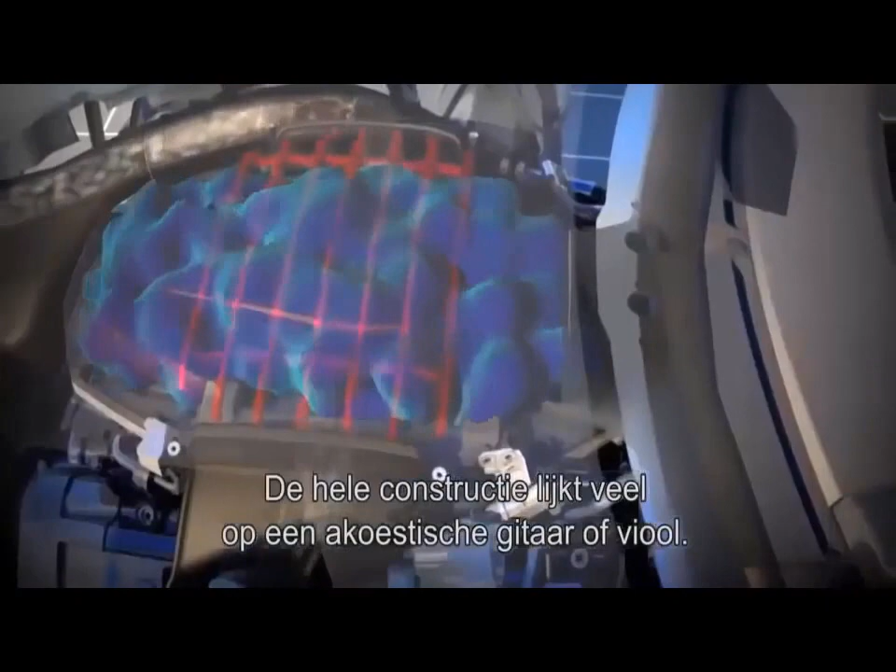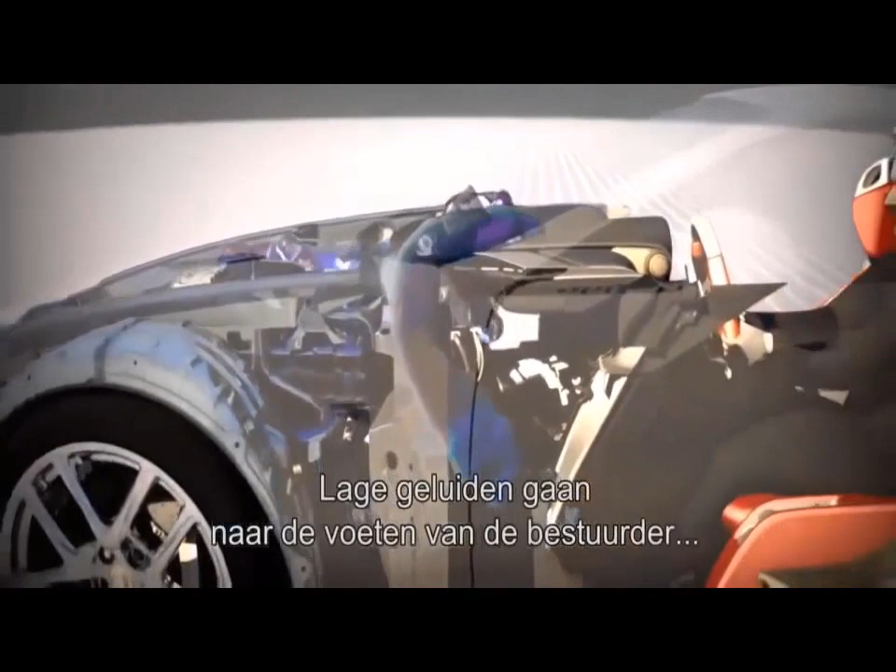The team channel these good vibrations back into the cabin using sound passages. We use these to send low-pitch sound to the driver's feet and higher frequency sounds through at ear level. The driver is in the middle of this dynamic surround sound system.

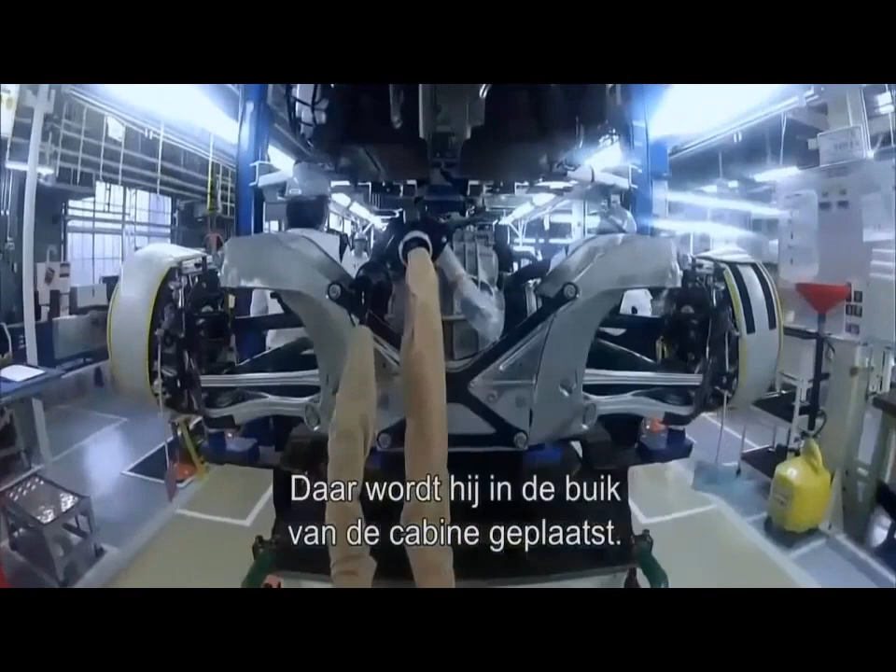The completed engine is forklifted onto a waiting truck for shipment back to the LFA works. Here, as part of the assembled drivetrain, it's inserted into the cabin's belly, guided only by eye.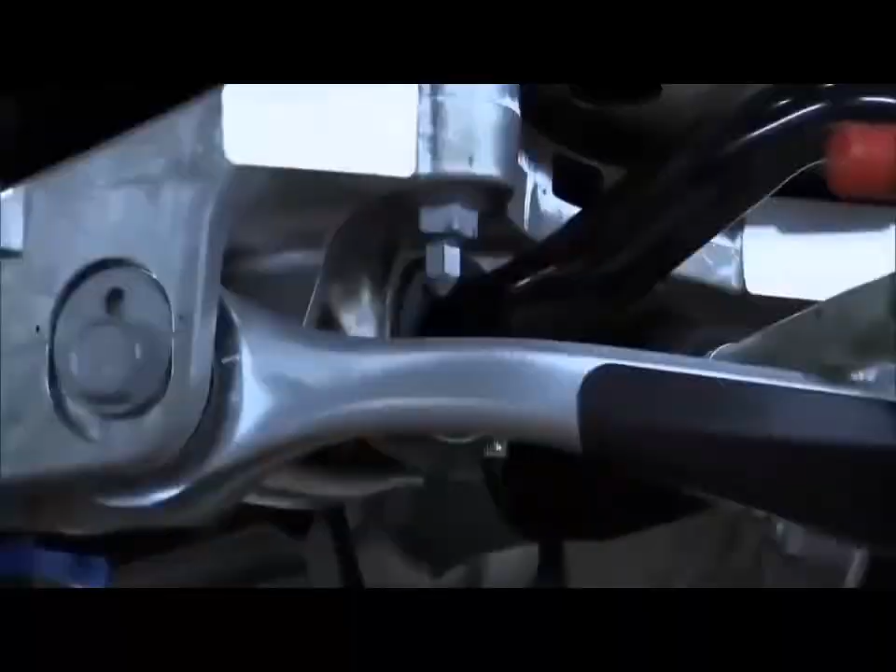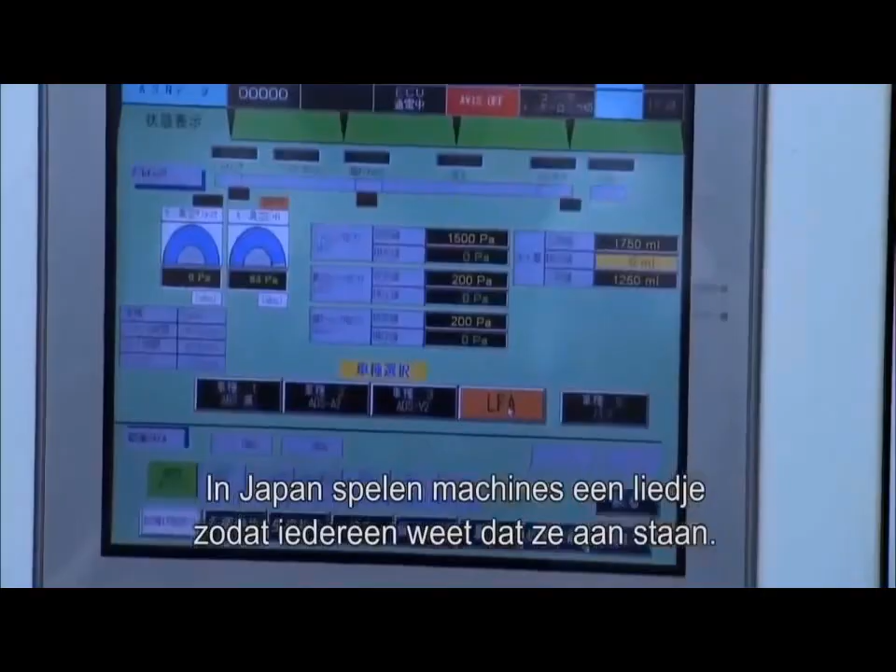With the guts of the car in place, it's time to feed them. An automated pump injects engine oil, brake fluid and coolant into the appropriate under-bonnet opening. In Japan, machines play a tune to alert anybody nearby that they're running—this one plays an American folk song. With the precise volume of fluid added, the pump stops, as does the music.

The car's 9 moulded glass fibre body panels are manufactured off-site. This material is both strong and light, but far cheaper to replace than carbon fibre, should the car crash.

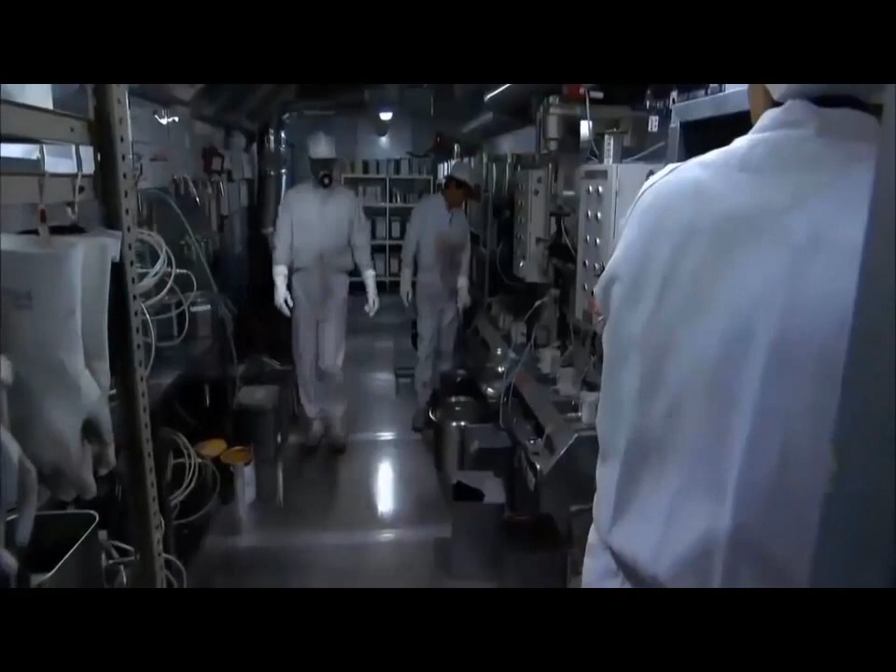The paint shop is under the same roof as assembly, but it's a very different world in here. At the LFA works, paint is one of the few production processes performed by robot. The company believes they give a more consistent finish.

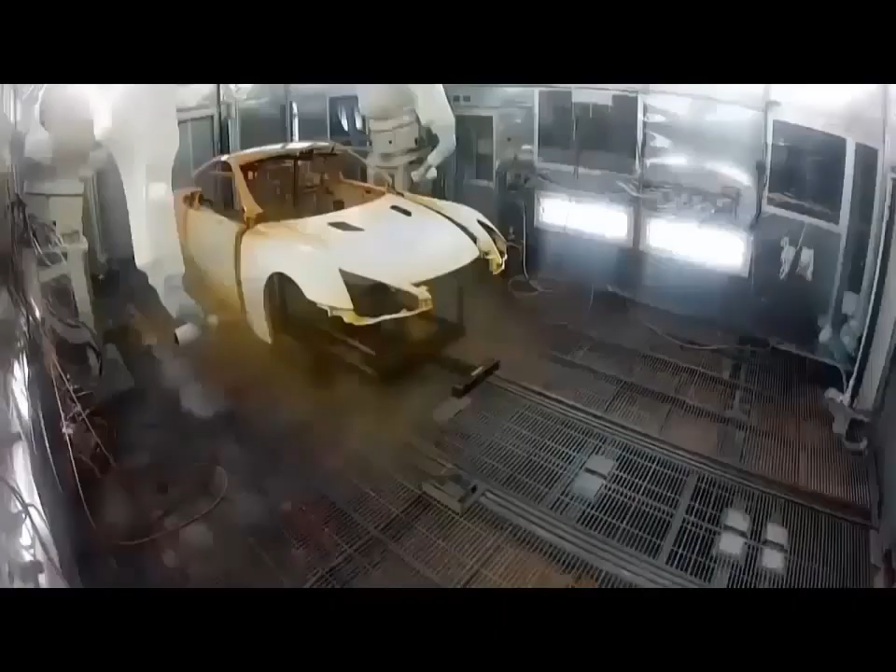But there's always an ongoing human battle in the paint department. Dust is the greatest enemy for painting—if dust gets into the paint surface, when it's heated, the dust swells up and causes a blister. So the atmosphere is controlled on a daily basis, and there's a strict dress code. Up to 5 layers of paint are applied.

And where robots can't reach, humans can. Job done. The sprayed panels are dried in an oven at 100 degrees Celsius for 50 minutes before being wheeled out for inspection.

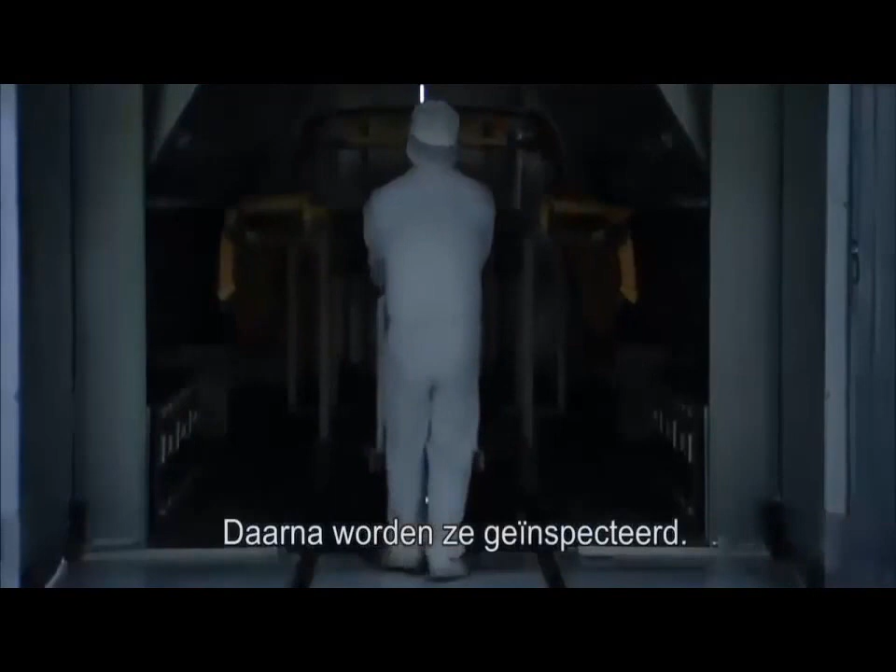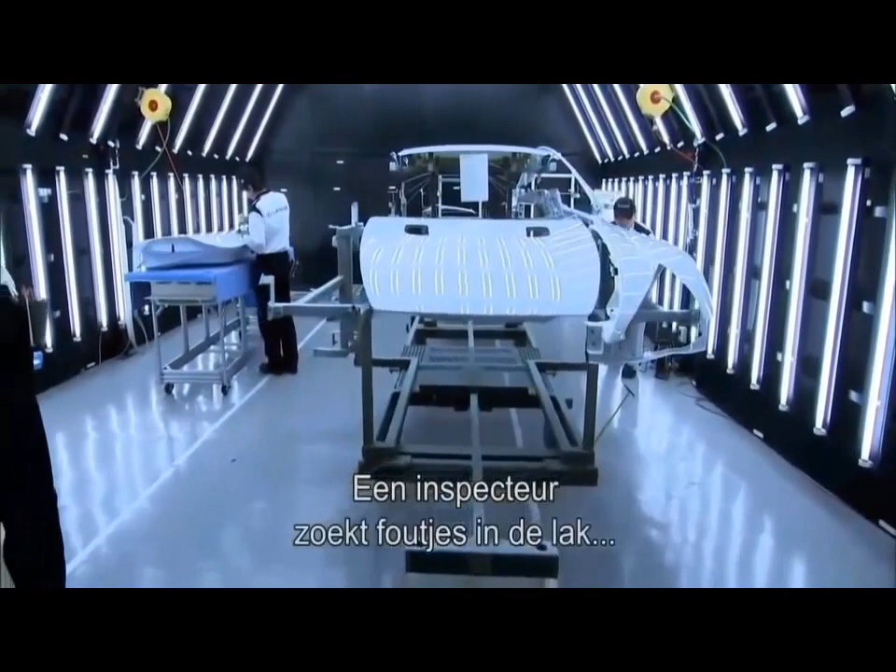The battle against dust continues, with water nozzles spraying a fine mist into the air to stop anything drifting onto the pristine surfaces. A bright light inspector spots any blemishes and marks them up to be polished out.

The completed panels are wheeled out of paint across the factory floor and attached to the carbon tub back in assembly at the 3rd position on the line, known as final. Here, the hand-stitched leather interior is installed, and the forged aluminium wheels with bespoke Bridgestone tyres are also fitted.

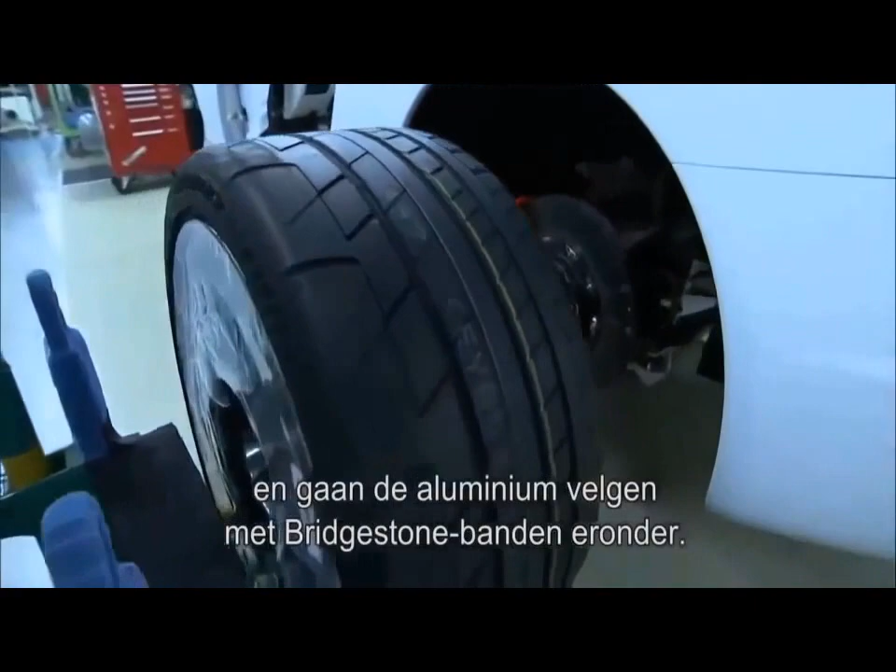It looks as if the associates are performing each task very slowly, but every one of them is working very carefully and with a high degree of certainty. If you compare it to a sport, they are top players who complete a successful play every time.

The LFA works runs like clockwork, yet there's no clock watching. The reason why there is so much time is that Chief Yamanaka tells us to take our time and work slowly, so that we can make something that we know is good. How can I put it? He says that in order to ensure quality, we can take as much time as we need. That goes for overtime as well—if it means we make something good, then we can do overtime.

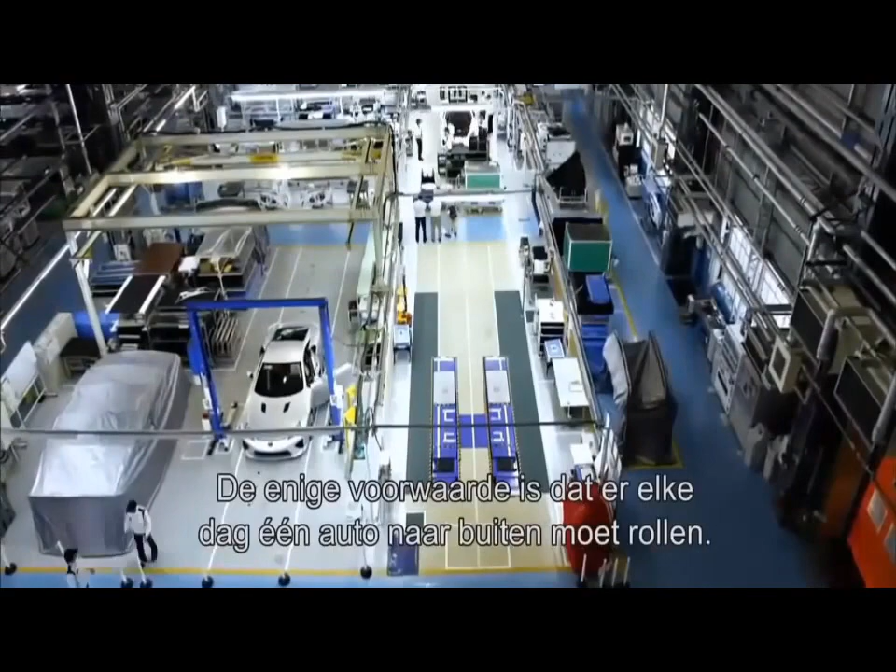The only stipulation is that one car must drive off this assembly line every day. And from the beginning, Chief Engineer Tanahashi was clear that only 500 would be built. At a car a day, that will take just 2 years. And then, this factory will close.

Making only 500 cars positions the LFA as a very special car. There is no plan to make any more at all. Even pricing the LFA at $375,000, the most expensive Japanese road car ever, a limited production run isn't going to recoup the costs of development, the use of cutting-edge materials, and unlimited overtime.

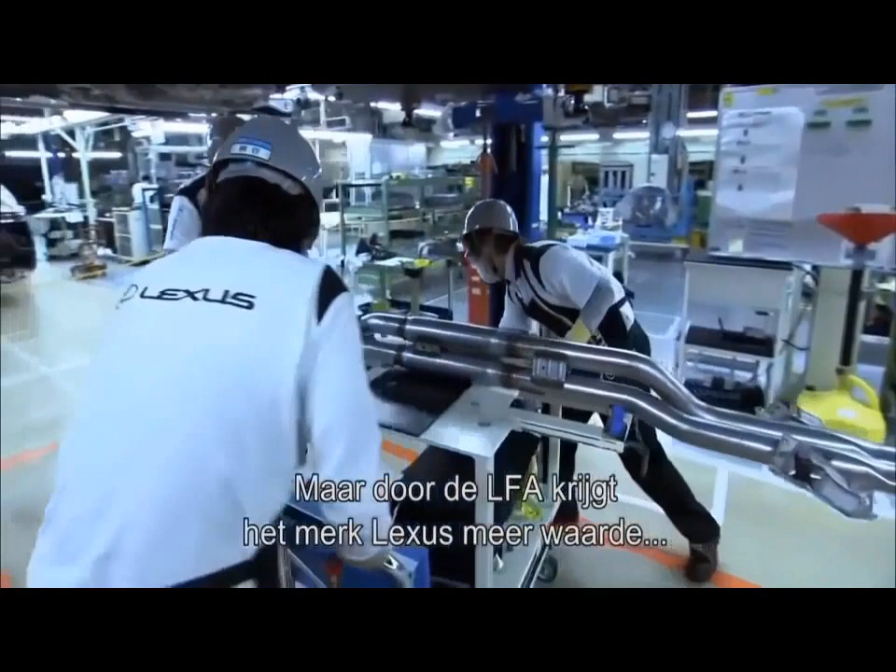I think it will be difficult to make a profit with only 500 units delivered. But by producing the LFA, the Lexus brand gains in value and is well received worldwide. I think the legacy will be left in technique, knowledge and teamwork for making cars that will please our customers in the future.

Back in 2004, with the prototype build, Chief Engineer Tanahashi takes a bold decision. He wants the car proved on the severest of tracks. Nothing in Japan fits the bill, so he takes the entire development team to the notorious Nürburgring in Germany. For us car makers, the Nordschleife on the Nürburgring is like a mecca for cars. This is where this car was honed.

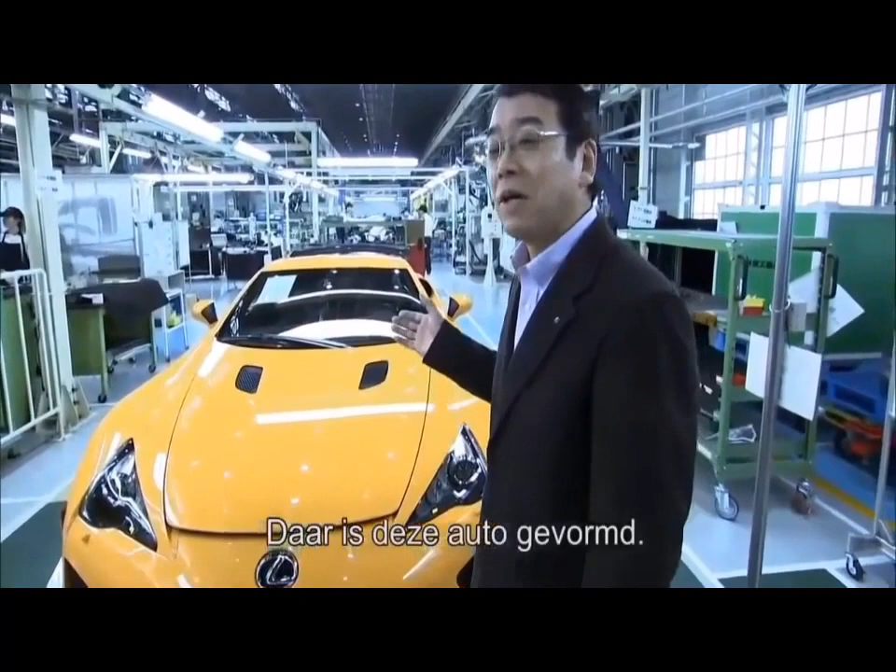The 20-kilometer Nordschleife section of the Nürburgring is infamous as the world's most punishing test track. For 4 years, the team tests every aspect of the car's engineering around the Nordschleife's dips, jumps, relentless corners, and flat-out straights.

The car's development makes progress towards its production deadline, but Tanahashi wants to fast-track its fine-tuning. In 2008, he throws it into the unforgiving world of racing and enters the Nürburgring 24-hour race. It was purely to get more feedback on the production type LFA and to improve it under real race conditions.

The brutal experiment works. A year later, the revised car wins its class. Tanahashi is finally happy, and in 2010, the LFA goes into full production.

In 2011, a special race edition of the standard LFA is launched. Its name pays homage to the racetrack that forged it. It is with thanks to that sacred place that we called it the Nürburgring package.

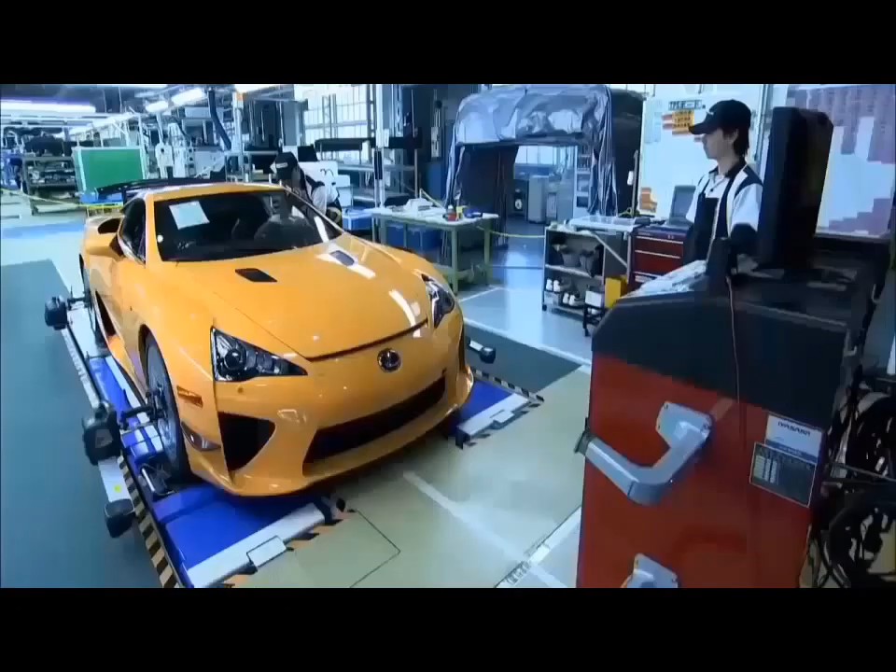Back at the LFA works, in assembly's last position, the wheels are aligned to ensure the car handles perfectly. After 3 days in assembly, the car officially moves to inspection.

The inspection process involves 7,000 separate checks. Hayashi Katsumi does the first of 1,482 of these under lights.

Right now, I'm inspecting the paint surface. I'm using my hands to feel for any uneven areas in the bodywork.

You have to touch it gently, like I'd touch a woman. I've been doing this job for 30 years. If I didn't have my wife, then it would certainly be my lover.

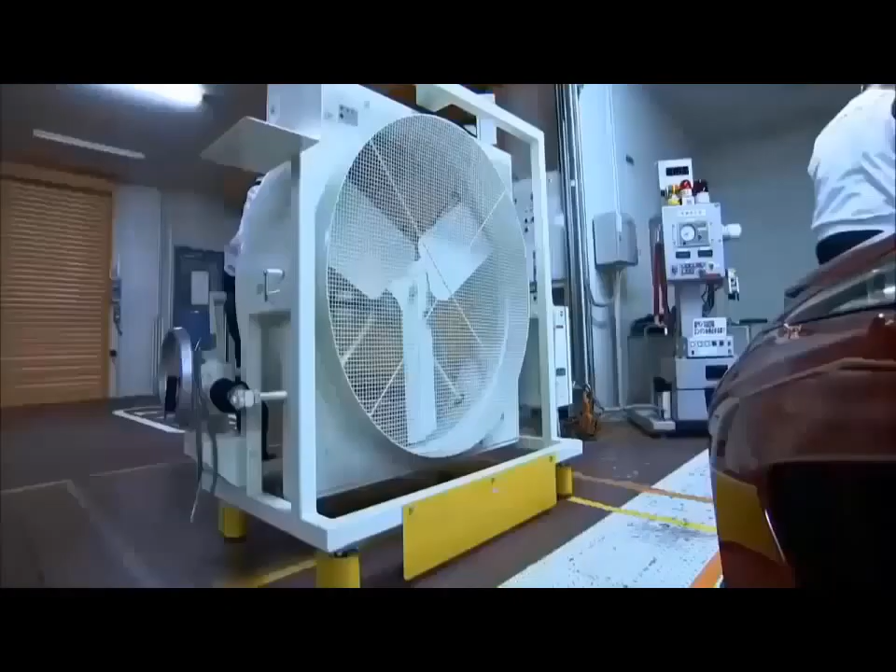With the internal and external surface inspection signed off, the car leaves the LFA works for good. It's driven through the Motomachi plant into quality control. This will be its home for the next 7 days.

The checks performed here range from speedometer and brake tests to water tightness. The reports fill a 350-page booklet.

Finally, test driver Amano Nobuaki ensures each of these cars is road ready when it leaves the factory. The car is bedded in on Motomachi's very own test track.

The masked sections of the bodywork are to protect vulnerable areas from stone chips. I think this is the best possible job in the world.

Amano checks the car's controllability, engine sound, power, braking performance, and vibration noise on the 1 kilometer track.

There is one danger driving this car every day. Every now and again, I just want to forget the job and drive this car away somewhere to have for myself.

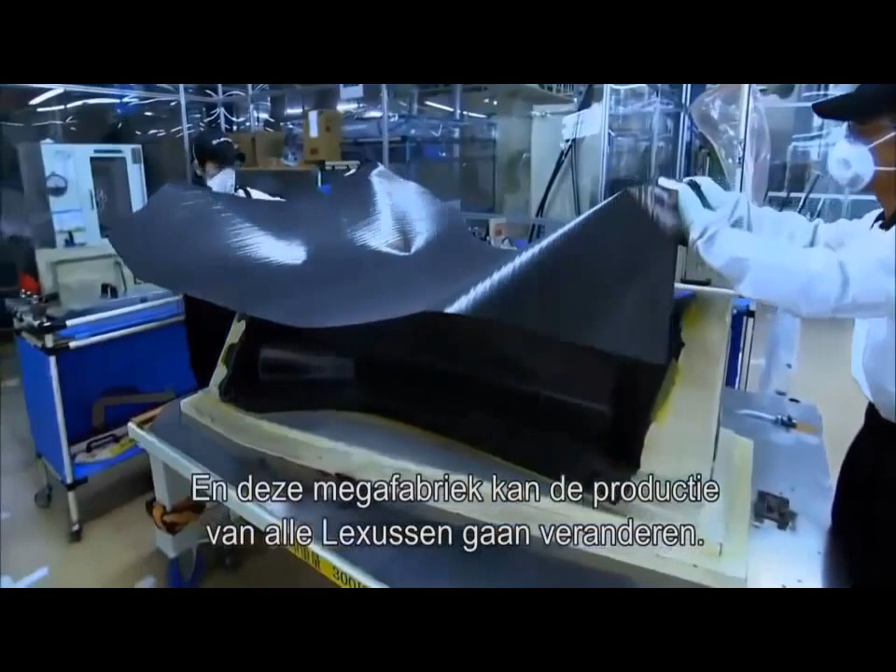And this Megafactory could redefine how all Lexus cars are built. We took on all kinds of challenges, and there were new production needs. I look forward to seeing the outcome of these, both visible and invisible, in future cars.